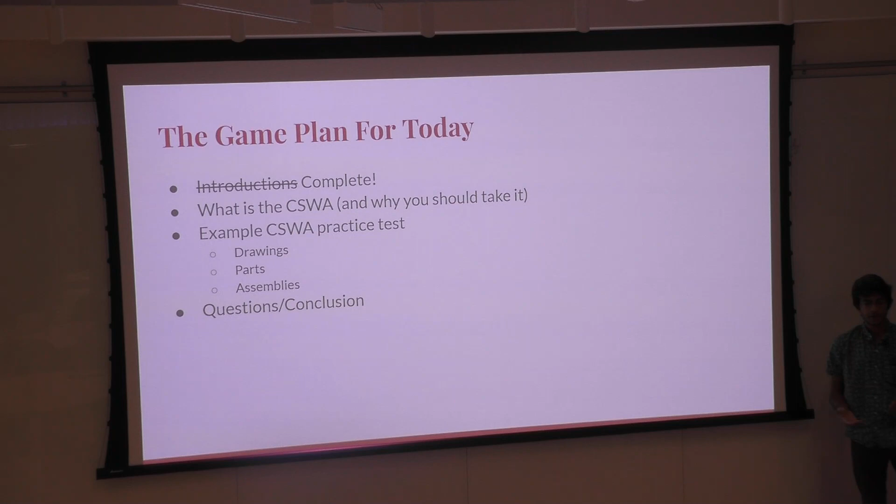I believe out of the millions of people that do SolidWorks, only some in the hundreds of thousands have the certification. So it's a very small percentage, meaning you guys will stand out amongst all other people. And for those employers that know they're looking for people with CAD skills, they can look for you guys and they'll see it.

All right, before we begin with actually going over the problems and such, are there any questions up to this point? If at any point during our presentation and during our modeling you have questions, just raise your hand and we'll come over and help you out, or we'll point to you and you can ask it out loud. This is going to be not very strict in terms of we have problems we want to get through, but our main goal is to help you guys learn, and so questions are a great way to actually get a better understanding of the material.

Okay, so thank you. So I think we've already gone over a little bit of the overview of what the CSWA is. But yeah, it stands for the Certified SolidWorks Associate in Mechanical Design. It is quite a long exam. You don't need to take 3 hours to actually finish the exam. I personally did it in about 1 hour, 45 minutes. So 3 hours is really if you're just really struggling, if you want to take a break in the middle. And you only need 70% to pass, so that's pretty good.

And you do need a knowledge of basic features, so everything from sketch tools to extrudes, bosses, fillets, chamfers, finishing features, basic drawing understanding, because you will need to identify drawings and, of course, model parts from drawings. You also need to know some of the basic evaluate features like mass properties, inertia, center of mass, stuff like that for assemblies. But yeah, basically pretty much the things that you would encounter if you're a regular user of SOLIDWORKS. Next slide.

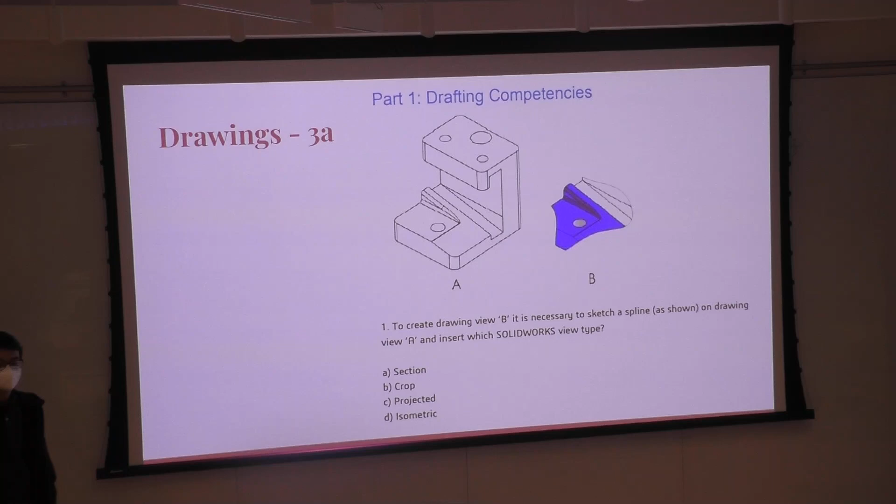Okay, I think it's been about a minute. What do you guys think? A, B, C, or D? What do you think? B? Okay. Why do you think B? Okay. No, that's good. That's process of elimination.

So that is correct. An isometric view is the most common view you should see of a part. You can see 3 faces at once. So that's A, right? You can see all of it, but that's definitely not B. Projected, that's kind of like PP that we saw, where you're looking at it from an angle. And so that's definitely not B, because you're not seeing the whole part.

Section is where you cut a part down the middle and you look at it from one side. This kind of looks like a section, you could be fooled, but again, you're definitely not seeing the whole part. And last, crop, you're only seeing part of the part.

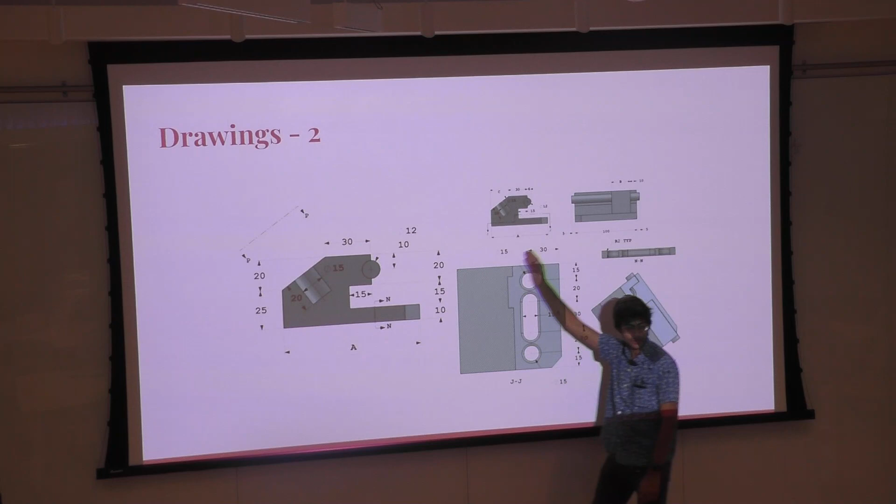I think section view here would be JJ. If you look at this one, see how it's cutting through the part itself and then showing that view? That would be a section, JJ. Well, actually, this whole thing is a section. On the left is a section view. And then NN is also a section. Okay, yeah. So what Abe said.

Section views cut into the part, and you'll be able to see the inside of the part. That's good if you have holes in the middle and want the dimension of the hole itself. Rather than using hidden lines to show the outline of the hole, you can just section view cut it and see the hole in the actual body of the part.

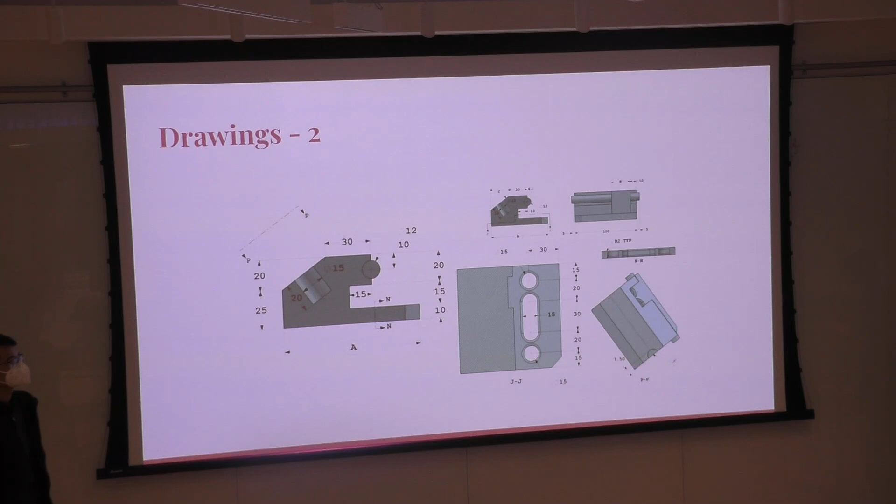Okay, this is the second practice problem. We'll take another 60 seconds. Okay. What do you guys think? That wasn't a minute, I know. What do you think? You say C? Why? Okay, that's good. That is correct.

It is C, a broken out section. A broken out section is where you can see the overall part, except for a small spline. A spline is basically an enclosed sketch, and that cuts into the part, so you can see the inside of the part.

So yeah, that's correct. One thing, I don't know if we put it in here, but the exam, when you take it, is proctored on your own computer. Proctored meaning it's software that they provide, and you download it and take the exam through that software.

However, you are able to Google the answers, not directly the answers, but more so you can Google what an aligned section is, Google what a detail is, check out what a broken out section is, and then compare it to the answer and say, hey, does this match here? And also, of course, you're allowed to use the SolidWorks help function within SolidWorks, like the documentation. So that's effectively the same as Googling, because if you're going to Google what an aligned section is, you're going to go to the online SolidWorks documentation. So yeah, either one is fine.

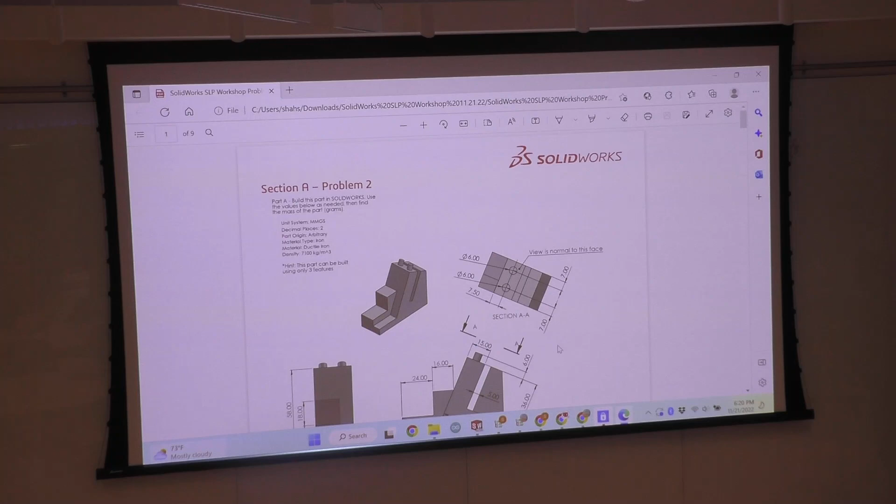So for now, we'll start off with section A, problem 2. This one should be pretty simple. It's nothing too complicated, and if you have simple CAD experience so far, it should not take you that long. This is going to be a problem that's easier than you'd see on the exam, but it's definitely a good place for us to start off because it helps with understanding how to work around the model and not just in a single right, top, and front plane sketches.

What we'll do is give you guys about 7.5 minutes to work on this on your own. And then in 7.5 minutes, we'll come back and I'll start modeling through it, and you guys can follow along. If you have any questions, raise your hand and Abe will come by and help you out. And also, the model is up here on my left.

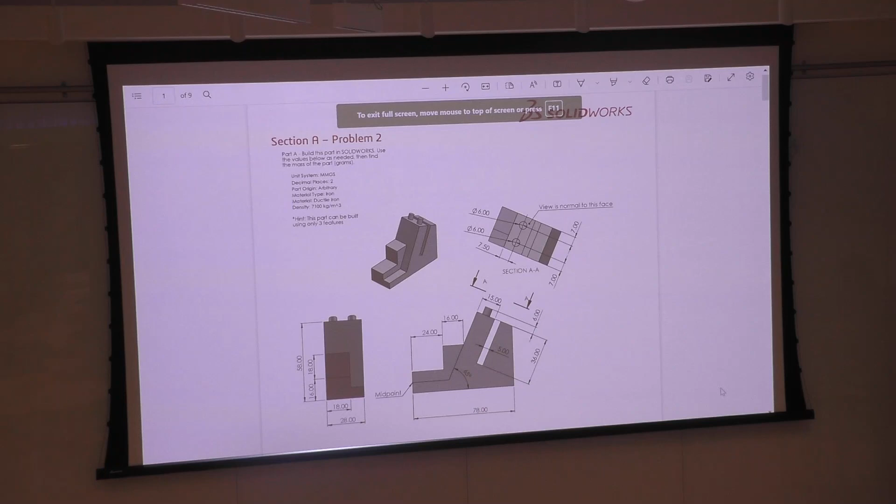Oh, yeah, it works out. Let's do that. Okay. Yeah, so 7.5 minutes. Good luck. I mean, sure, any timer website will work. Yeah, I'll come around and give help. You don't have the problems email? Do you want to email it to him? He needs the problems. Wait, so you didn't get the email at all? Okay. We sent out the email last night at 10:20. Did you sign up after 10:20 p.m.? Okay. Just go to the last person who responded to our session form then. If you want to just forward him the email we sent out last night, that would work too because it has the attachment.

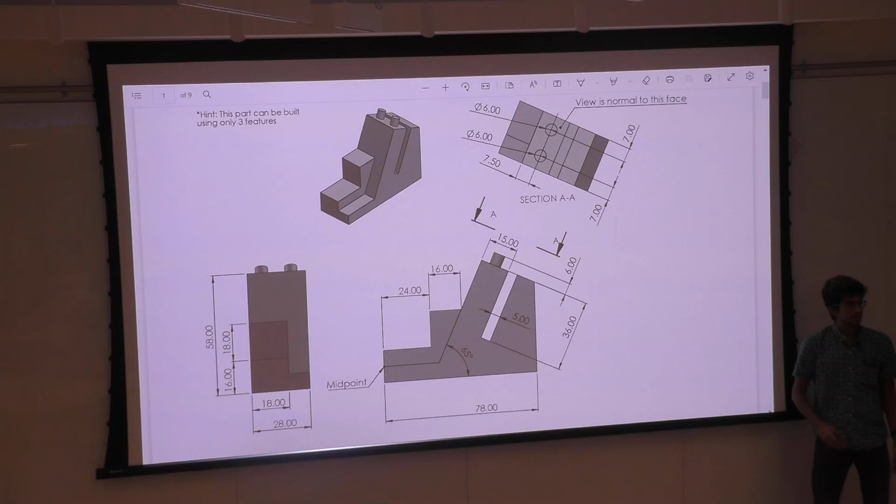Okay, that's not bad, yeah. I wouldn't recommend, for now, worrying about that too much. I think that's more like once you know how to build a part and the different ways to do it, then you can figure out how to do it in a few features. For now, your first goal should be, how do I get the part made accurately? But that's not a bad idea to keep in mind. And when I do this with you, I'll show you how to do it in 3 features, so you can see the process that goes into that.

Right. Also, the exam only asks you for these parts. It only asks you for mass. So you don't need to worry about if you hit 4 features, 5 features, whatever. As long as you get the correct mass, you're fine. Exactly. It's just to consider. You can make it in 3 features. Yeah. It's a little bit of an extra challenge. All right. Any other questions before I begin?

All right. With that being said, I will start this. Keep in mind, while I'm going over this, please feel free to raise your hand and ask questions. If you're struggling within SOLIDWORKS itself, raise your hand and Abe will come to you and help you out. If it's more of a conceptual question, or a, wait, what are you doing here, I will answer that question for you too.

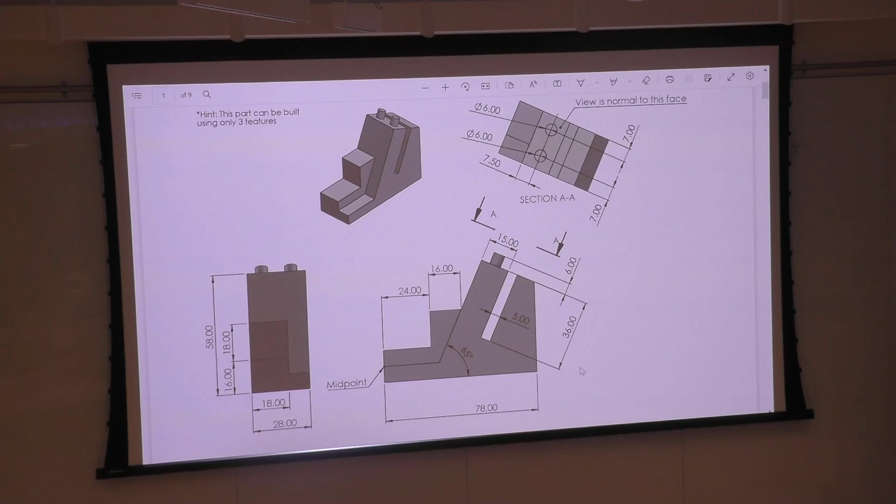So let's do this. One thing you're going to notice I'm doing is Alt-Tab. If you're on Windows, Alt-Tab will switch between your 2 latest screens. So if I do Alt-Tab, you can see all the screens I have open. And so I can go between SOLIDWORKS and the drawings really fast and easily. This will probably help you in the exam itself, unless you have 2 monitors. If you have 2 monitors, you're chilling. If you have 1, you just want to Alt-Tab. It's fast, easy, and you can quickly look at what you need to see.

So let's do, okay. All right, so what am I looking for when I first open this up? I'm looking for the basic geometry. I'm trying to analyze this in 3 planes mainly. Like, how am I going to construct this? What are the sketches I need to create this?

And so when I look at this drawing, the first thing I think of is, hey, I can build all this geometry right here in 1 sketch. Not thinking about the different levels of boss extrusions that need to happen. I just think if you take a silhouette of this, all this can be made in 1 sketch. So in my head, I'm like, okay, this could be a good starting place right here. That will get me a good majority of what I need to get done here. And then I can focus on the 2 knobs afterwards.

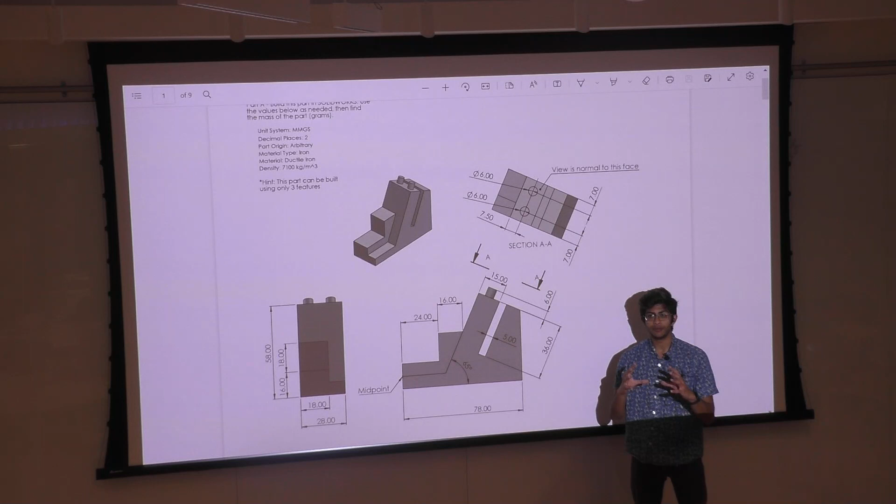I saw some people trying to work it from the other side, from the front face going inwards, outwards. And that's one way to do it as well. That would work. You could do it that way and then just cut into it from the side, and that's definitely a valid way to do it. But for me, I'm trying to think about extrusions, because extrusions will help limit the amount of features you have to do. With additive manufacturing in SOLIDWORKS, it's a lot easier to build up rather than cut down. By that, I mean it's better to try to extrude something rather than have a big block and cut into a block to create what you need.

And so let's start that. What I'm going to do is create a silhouetted sketch of this image right here and dimension it accordingly, and then I'll show you guys what to do from there. So looking at that, it was in the right plane, so I'm just going to sketch in the right plane. And we always want to use the origin when we start the sketches. So I'm going to use it as the bottom left point right here. It doesn't matter bottom left, bottom right. Just want the origin somewhere in your sketch.

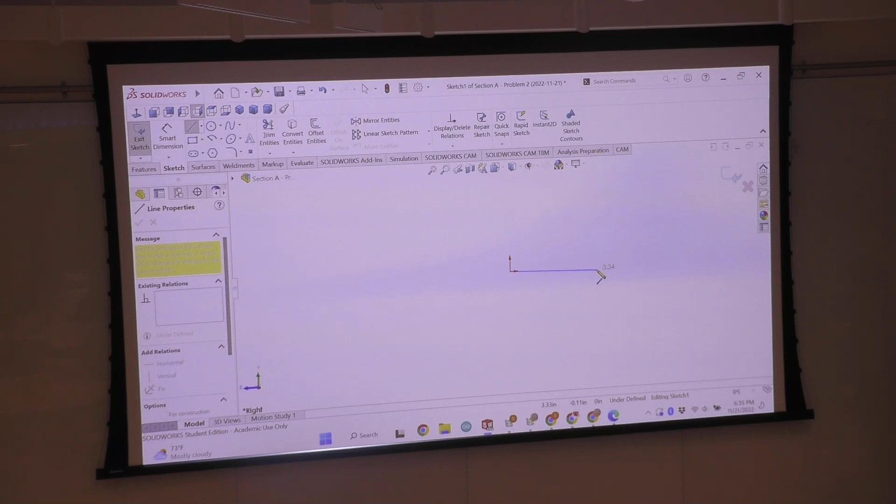Oh, but before I begin, notice how in the bottom right it says IPS. That means I'm in the wrong unit, so I want to make sure I click that and switch it to MMGS to ensure that when I model this, the dimensions will be correct. So going back to the right plane, we can see that it's telling us to go across, up, and then diagonally that way.

I'll try to talk through this as I do it. It will be a little bit hard because when I model, I don't normally talk out loud to myself. So if at any point I'm doing something and you have a question about it, please just call it out. I'll be happy to explain what I'm doing.

This first step, I'm not trying to get accurate to-scale measurements. I'm just trying to get the rough outline. Notice how the degrees aren't going to be perfect, the lengths aren't going to be equal. It's all a matter of the rough outline. So looking here, I have 2 options. Either I can come down going this way and then build this part, or I can go around. It does not matter. This is just a sketch. You can do whichever option floats your boat.

So for me, I'm just going to come down here and then go across and come down. And then I'm going to do this part by going up a bit, this way, up, and then across. Okay, this is our very rough sketch. It looks similar, but not quite what's shown here. Everyone good so far? Anybody super lost? No, didn't lose anybody? Awesome.

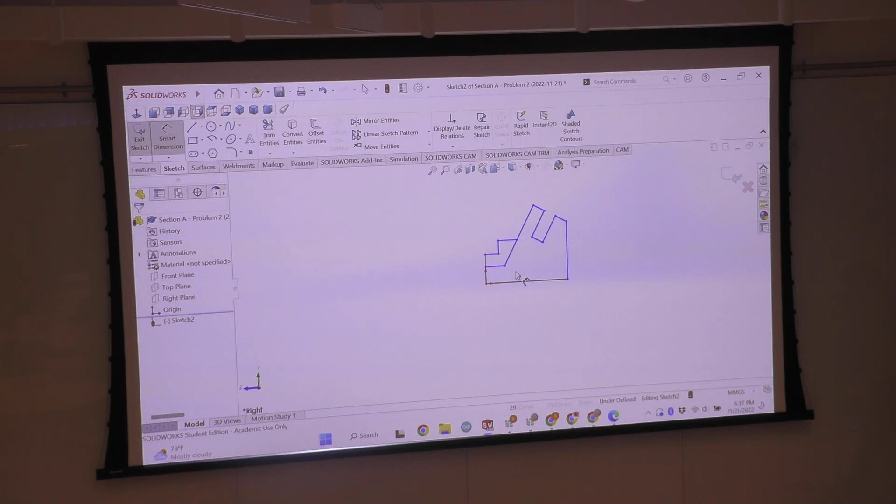So I'm going to add horizontal, make sure these lines are horizontal and vertical. These should be perpendicular. That's fine, this is vertical, that's horizontal. And looking here, these lines are equal, this one and this one. We just make that equal real quick. Okay, now we're going to add dimensions. Looking at the bottom, we have 78. So we hit smart dimension, 78. Because it's a big number, we can tell that we're in the correct units because it's millimeters. Then this is going to be 36.

24 and 16, so this is going to be 16, be 24. So things are getting a little wonky. That's okay. Don't worry about it. Just keep adding your dimensions. Everything will sort itself out. And if it doesn't sort itself out, then you can fix that by redrawing part of it or redimensioning part of it. That will help reset what needs to be reset.

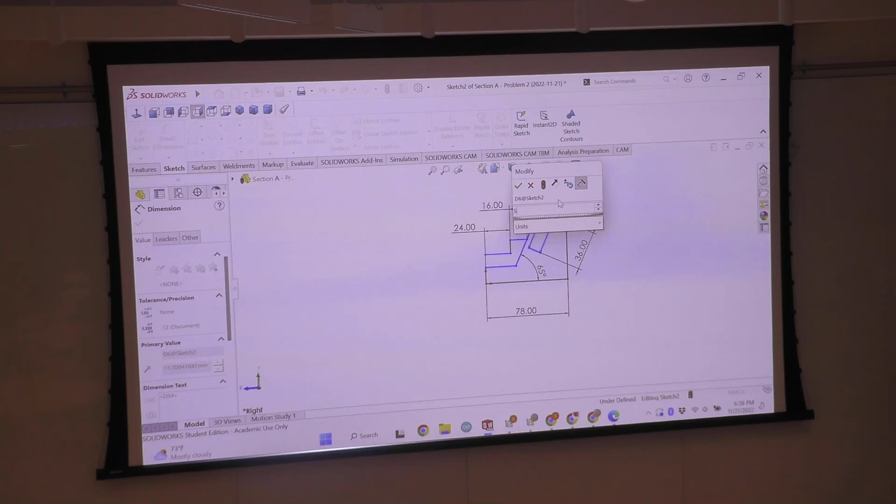65 degrees. So we're looking at a width of 5 here. And then, so okay, what I've done so far is I've sort of just looked at this one sketch. So that's 15. So that's the last bit I could add here. But there's so much blue. Blue means that it's underdefined, and we want it to all be black. So what do we do here? We have to look at the other two sketches that it provides us. Look at the other drawings and dimensions, and then figure out from there.

So looking at here, this bottom left one, I see that the height of the line here is 16, and then it's 18. So that's referring to these two, I believe. Or actually, it's referring to this line with this one right here. This is going to be 16, as shown here. And the reason I know it's not this midpoint line right here is because if we look here, we see a smaller line and this top one.

So I'm just realizing that this is what that middle line right here is. And the second one is going to be this line right here. And then we see that's 18 above here, so we can easily dimension this to be 18. And right away, we're getting a lot more black, which is great. Now we look in the top right here and see what we can find. I don't know if we can find too much. Oh, we can add this right here. This is 58 high. So it's looking like from the top point right here, this corner edge down is 58. So by going back to smart dimensioning and then adding this dimension there, we can make this 58.

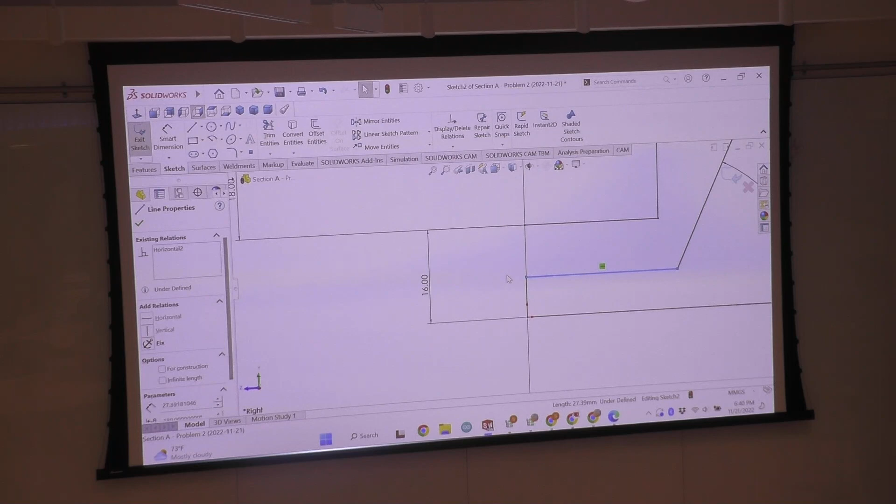If you're working with global variables and things that need to change, you want to make sure that this won't affect any of that. And we'll go into what global variables are in a bit. But for now, we'll go back to dimensioning just this one to half of the length of 16, so that's going to be 8. And that midpoint's that line right there, and we should be good. So notice how everything's black. At the bottom it says fully defined. We're good now. We have our main sketch done. Are there any questions?

Another reason why I chose to do this sketch first was it looked like the most complicated one. Getting the most complicated sketches done first will definitely help out later on because that's where all your mistakes will probably lie. So if you get that done well and correctly, the rest of it's just easy. Okay, so moving on from here, let's exit the sketch, and we want to do an extrusion. So we want to do features, boss extrude, and the sketch is selected. So we want to select the contours, and we'll start with this area. It doesn't really matter which one you start with, but you're going to need 2 boss extrudes on this one sketch. I'll show you how to do that.

So we're doing this thicker area, and looking at this bottom left one, we see that the thickness is 28 millimeters. That's the total depth, I guess, of this part. And so hit 28 for the depth here.

And then we have this little bit that we need to do still, so we can just click this arrow down here, click Sketch 2, and extrude boss base. We're able to now click this new area. It is a depth of 18, so we're going to change this from 28 to 18. And bam, there you go. So that's the majority of your part done. And we've only used 2 features so far, so we have 1 more to go.

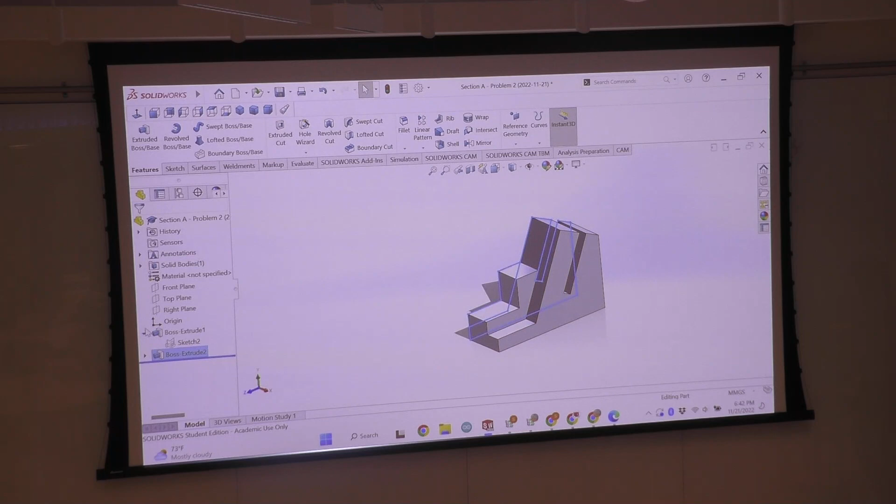Now the last part we need to do is add these little knobs at the top here, and that's done with these circles. I hope all of you know how to make a sketch on a plane. If not, I'm about to show you. We just have to rotate around. I'm doing this by holding the middle click button to rotate around the part. Click the face that we want to sketch on. So I left click on the face and then left click the sketch icon.

And now we're sketching on this face, which looks weird, again, because of the angle at which we're looking at it, since it's an angled face and not a straight down top face, but trust that we're sketching on this face. So the 2 circles of 6 diameter, 7 from the side, and 7.50 from there. A few ways to go about this. We can just start by sketching out these circles. I'm going to zoom in, and we can add dimensions.

Since they're both the same dimension, I'm just going to dimension one of them and then put an equal relation. This means that if we need to change both of them, it's really easy by just changing one dimension. It'll help us out if we ever need to go back and make edits. This is only good if you know that both of the knobs should be the same size. It's more of an application when you're modeling for a car or a part. If you know that 2 things need to be the same size, use the equal relation. It makes your life a lot easier and makes the sketch a lot less messy.

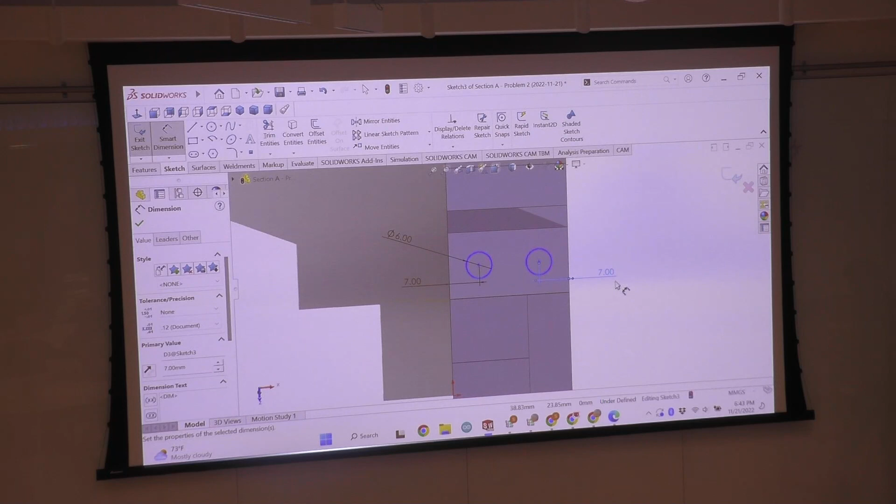So going here, we're going to just add 7 from the side. There are, again, cleaner ways to do this, but for now I'm just going to do it one at a time because the cleaner ways might get a little bit confusing. And then 7.50 from the top. Now, we know that 7.50 is halfway through because we see the 15 in the bottom right sketch right here. But let's say we didn't know. We'd want to make sure that we're doing it from this line right here and not from this bottom one, just in case it's 16 and this should not be centered. We want to make sure we're hitting the correct line, and that's going to be this line right over here.

And so in our sketch, it's this one that I'm using right now, and that's 7.50. Both of them are in line, so I'm holding Shift, clicking both center points, and clicking horizontal. Now they're both black, which means they're both fully defined, and we will extrude these. It says right here it's 6, so we'll make this 6, and we're good. And so now we have our part basically modeled.

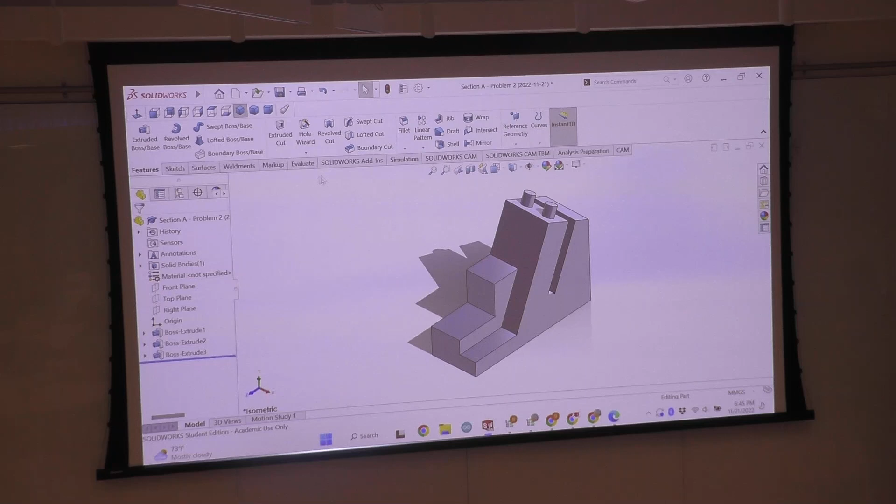Last thing I want to do, and this is going to be important for the exam, is you've got to add your material. It does not matter if you add your material at the beginning or at the end. So I'm just going to add my material now. It says it is ductile iron, and the density is 7,100 kilograms. So I'm going to right-click on the material, click Edit Material, and look through the materials that SOLIDWORKS provides to find it.

So it's an iron, ductile iron. I'm just going to make sure the mass density right here, 7,100, is correct. It should never be wrong. If it's wrong, something within SOLIDWORKS is probably wrong. It's just good verification that you selected the correct material. So apply, close, and now we can go to Evaluate, Mass Properties, and we see that the mass here is 497.28 grams. If we scroll to the bottom and look at the answers, the answer should be 497.28 grams. It'd be really embarrassing for me if it was not.

In any case, do you guys have any questions about this? I know I sort of went through it. No one really stopped me, but if there are any questions, now is the time to ask before we move on to the next part. Yeah?

So did that answer your question, by the way, of how to do it? It was your question about how to do a few features? It really starts off with just finding the most complex sketch and then doing it that way. Yeah?

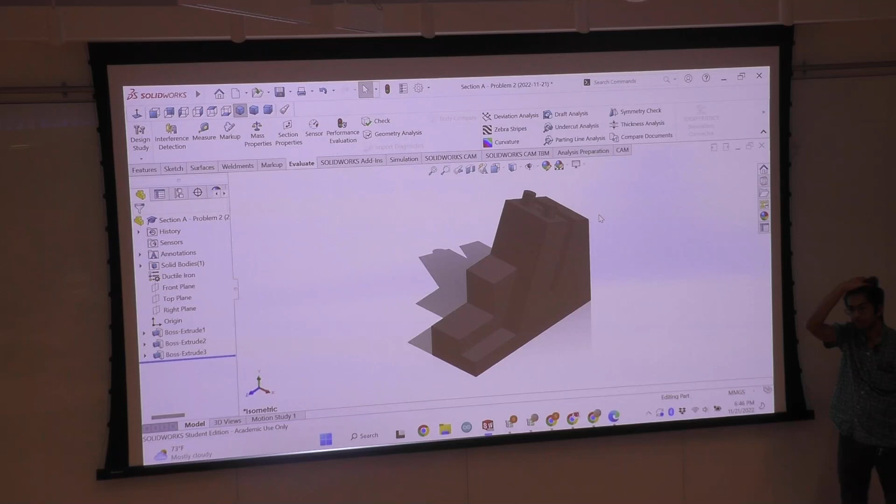Yeah, so the only time it won't work itself out, it's really annoying when this happens. I'll show you guys with a quick part here. It's more so when, notice how when I modeled part of it, one of the lines went down lower than another line. If you add a dimension between these two, it might push this bottom line up higher when you want it flipped around. So that's just something that might be a little annoying. I'll show you what I mean real quick.

Like if I have a... It could help, yeah. So if I do something like here, and then I want to do something like this, for example, and then I measured this, because this is going to be 0.69. So if I want it to be in this order, and I go here, I write 0.5. Oh, what just happened? Oh, okay, so it's in degrees, and that's because this was not a straight line. So that's one issue that might pop up. So you want to make sure that your lines are going to be straight. Let's make sure this is straight as well. Okay.

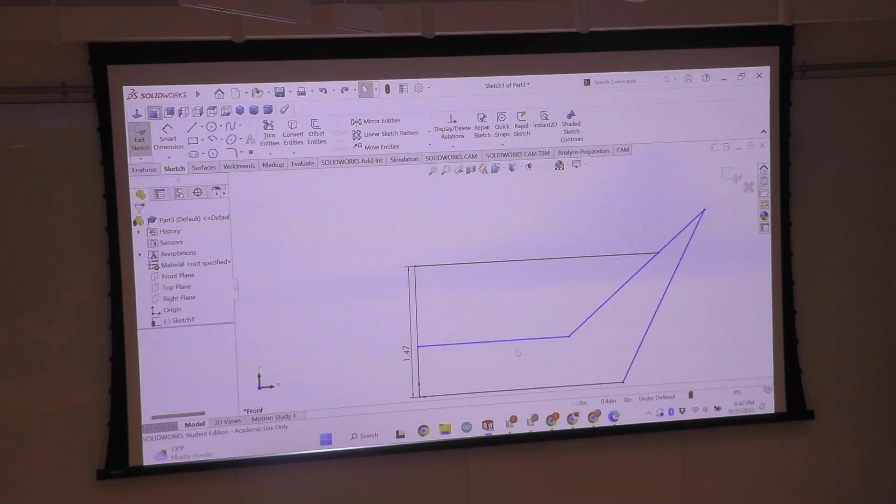Yeah, so going back to the dimensioning, if I go here and do 0.5, or size. Okay, well, everything stays relative, but if I were to, okay, well, kind of defeats the point. But something like this where it changes might occur. And then you need to move it down manually to make sure it stays between your two lines. They're not hard fixes, it just gets annoying. But if you add the relations, like I showed you making it horizontal, that'll help with the angle situation.

Basically, long story short, do the relations first, then do dimensions, because that'll make sure everything's constrained properly, especially with your perpendiculars, your parallels, your tangents. It helps with doing circles and lines. You want to make sure they're tangent, because if they're not, they'll come apart or they'll be connected in a weird way. And that'll get really ugly.

Okay, are there any more questions? Did everyone sort of follow along with how that part was modeled? Anything confusing in that regard? Okay, are you guys ready to move on, or do you want some more time with this part? I'm good for both. Raise your hand if you want a little more time with this part to figure it out on your own. Raise your hand if you want to move on to the next one. Okay, a few of you didn't raise your hand. Do you have a preference? No preference? Okay, let's move on.

If you're still working on this, that's okay. I'd recommend sticking with us for the next part and then come back later and ask us your questions afterwards. In the meanwhile, I'll pull up the next part. This one is going to be Section E, Problem 2. Would you prefer if I just model it right now, or if I give you a little bit of time to work it out on your own? Raise your hand if you want the time on your own. All right, cool. We'll give you about 10 minutes, so until 7 o'clock.

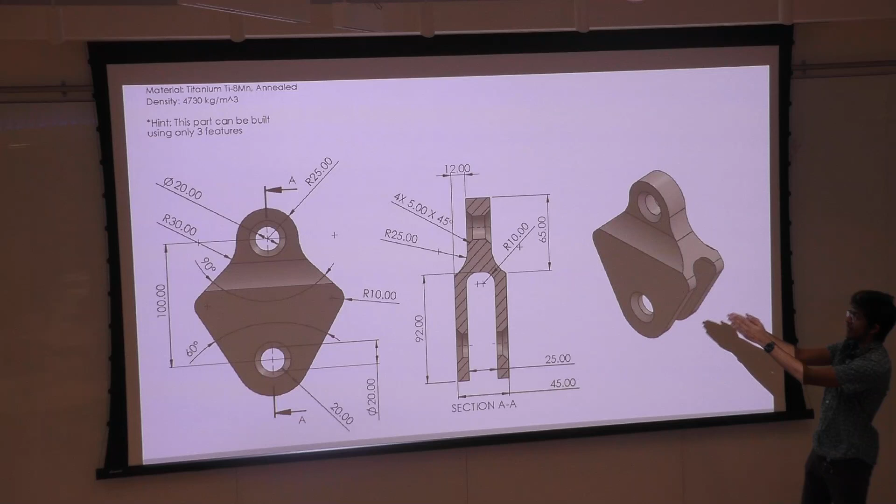Can someone guess which way might be the better way to do it? Which face? Should we start off doing this one and then cut out that, or model that, cut this out? Left one, model left, cut out right? Yeah. So going back to what I said about complexity, we want to do the sketch with the most complexity, and looking at that left one, that looks more complex than this right one. So let's start off, and we'll start sketching this on the front plane.

So let's see. Okay. So looking up here, we have MMGS, titanium alloy. For this one, I'll actually just set the material first, because, oh, my bad, it does not matter what order you do it in. So titanium alloy, we're looking at Ti8Mn annealed. Just check real quick. Your density is 4730. You're good. Apply, close. All right, next thing, IPS.

Let's change to MMGS. There's also a way if you just ever want to work in MMGS, which honestly is my preference. It's just recently I've been doing a lot of inches for class and projects. I prefer MMGS, and there's a way to change your default. If you have a question about how to do it, I can help you out later. But this is a really quick, easy way. Just click the bottom there and change it. All right, front plane. Let's do this.

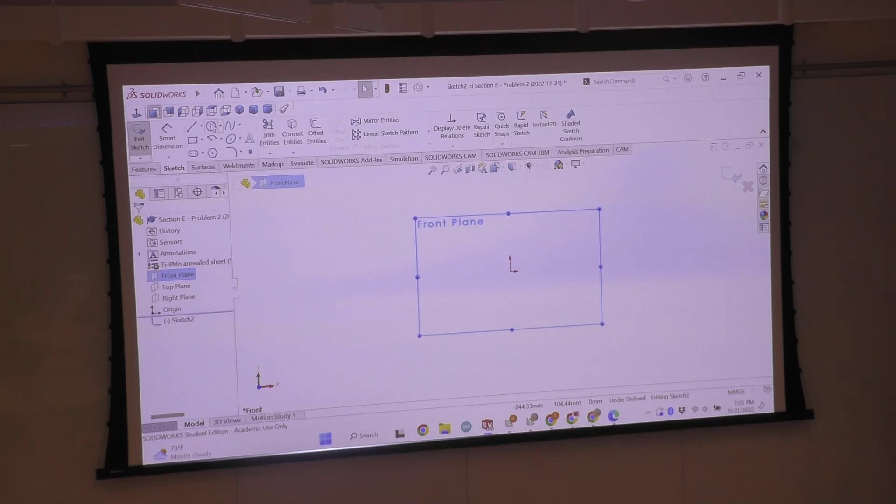So starting off here, when I see circles, I immediately think I want to put the center point of this circle on the origin. That way it just makes it concentric, and it's really easy to dimension everything off of that. So I'll start with this top. It doesn't really matter if it's bottom or top on the origin. I'm just going to do top because that's what I prefer. And so we'll just start off with the rough sketch. So we have 2 circles like this.

You could also do it with a circle and an arc, and actually a circle and arc might be better in this case because you have an R. When you see an R, you know that's a radius, and R generally means an arc that you're using. And when it's this sort of shape, that means diameter. You can achieve the same thing with circle and circle without using the arc. Then we have two lines coming out this way. You see a curve here. That can either be a fillet or a 3-point arc. For now, I'm just going to make two lines, and we'll figure that out as we go.

Actually, looking at this right now, I realize that these two sides are identical, meaning we can mirror it, and we don't have to draw both. We can just draw out one side. By the way, if you ever rotate your plane accidentally, click the normal to button here, and it'll make it flat, your face on the plane again. In any case, I'm just going to draw a center line. This one does not need to be dimensioned. It's just going to help me when I want to mirror it afterwards.

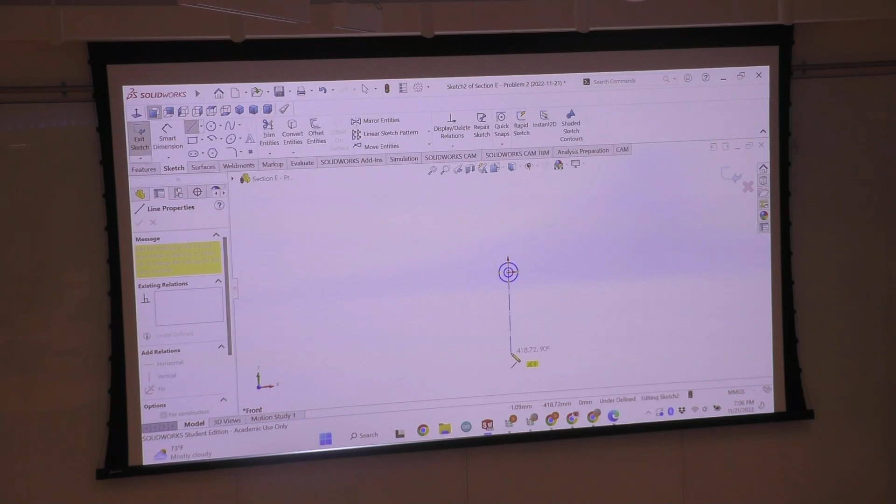So center line, and then I'm going to look here and see that this is a straight line, and it comes down this way. Once again, you have some sort of arc, but I think I could do it with the sketch fillet. So we're going to connect it here, come down this way, and then come this way. We have another circle that's on the center line, so we'll just plop that somewhere here.

You notice when I hover here, you see a yellow point. I want to avoid putting my circle on this yellow point because that's going to create a relation between the center point of the circle and the midpoint of the center line. That's a relation I don't really want, and it's going to be complicated to dimension because that relation will stop it from dimensioning properly. So I'm just going to make sure it didn't connect and we're good. And now we have the general gist of this overall shape.

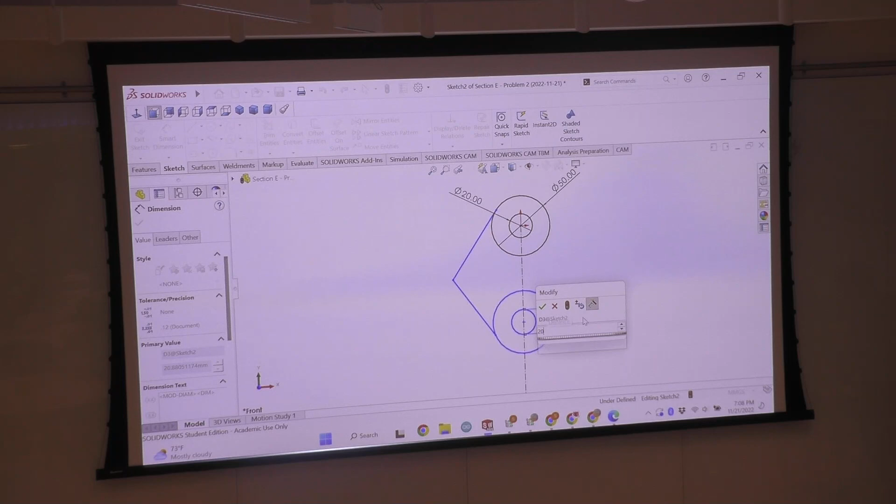So looking at this, we'll start with the circle. We have 20 for the diameter in the middle here. So smart dimension, and then 20 millimeters here. And this radius is 25, so we know that's going to be a diameter of 50. And we'll do the bottom down here too. Okay, so this distance actually is not the diameter. It's a distance between this arc and that circle, which is perfectly okay. So we see this is 20 for the diameter. And these two, you click on both to create the distance between them, and set that to 20.

And now when we look down here, we see that this is a straight line that goes right into the circle. So we know that has to be tangent. And so we can just click here, shift-click the circle, and we can make sure that it's a tangency constraint. So we changed it from coincident to tangent. Coincident was just that the line intersected the circle. Tangent means, as you guys know what tangency is, it's like one point of intersection between the entire line and the circle. And that means that if we were to shrink this, for example, to make this 10, the line remains tangent to the circle. So back to 20 here.

And then looking at this point, this is 60 degrees from the center. Or sorry, 60 from side to side, so 30 from the center, and that's 45 from the center. So we can go ahead and smart dimension these two lines right here. This is going to be 45 from the center, and this is going to be 30 from the center here. Now, because it's getting a little bit close, it's hard for me to really see the dimensions. I'm going to add the height dimension to spread it out.

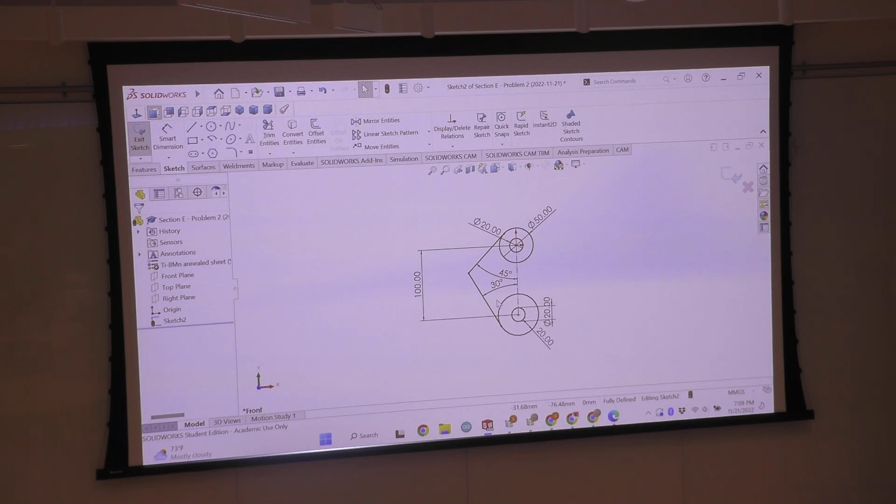Okay, let's see where to look here. Right here, we have 100. It's between the two center points of the circle. So from this point to this point, we can do 100. Now, one way you could have done this as well is, notice the center line I have here. This could have been connected at the center point, end to end. And then you could dimension that center line to be 100, and that would also change the height of this shape. Either way works. It's up to your preference.

Anyway, everything is black. It's technically fully defined. However, as you can tell, it doesn't look like our model yet. So, looking at this, let's figure out what else we need to do. So we need to add these fillets. So this is 10. But before we do that, I want to make sure that this connection is correct. And currently, it doesn't look like it is correct because this should not be tangent to the circle. So I'm going to delete this right here.

I'm going to remodel this where off the circle, I'm going to do a 3-point arc. So clicking this point on the left side of the circle, and then clicking a random arbitrary point here, create a 3-point arc, like so. And then I'll create a line from here to here. Now we'll smart dimension, and we'll do this at 45 degrees. And we know this should have a radius of 30.

And then we know that this line looks tangent to this circle, so we can make that tangent right there. And notice how we can still move this around. So we need another dimension here that'll help us out with this. So let's see, what can we find? Is it tangent to this? Oh yeah, sorry, I should make this tangent. Thank you, Abe. So these two should also be tangent. And once you do that, now the entire thing flows in one go. From the circle, it flows down to this line, and it looks smooth just as it does right here.

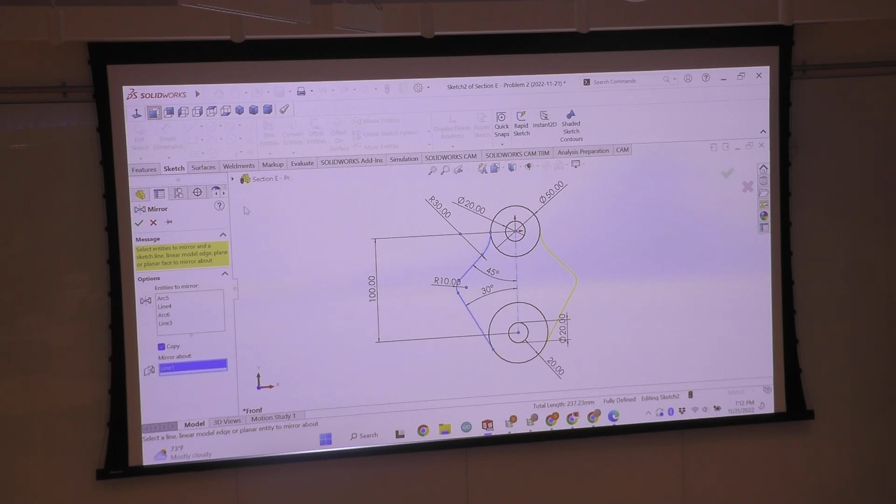Now the final step is just to mirror all this over. And that's really simple by just using the mirror entities tool and clicking these. You can mirror the circles, but it shouldn't do anything at all because it's just mirroring on itself. I'd recommend avoiding doing that in case it creates any overlapping geometries. So once we mirror, everything is all good. And now we are ready to extrude. So it's a complicated face, and now we're able to extrude all this area right here. And we look at the depth, and the total depth is 45.

We're going from end to end, and it'll cut out what we don't need afterwards. So 45 degrees, or 45 millimeters. And that's our block. So that's a giant block that should be this. So if we go to Control 7 view, Control 7, by the way, is isometric. Looking at this, this looks roughly the same shape and parameters as this shape right here. So we're doing good. Next up is to go on the right plane.

I can't exactly click any faces here to extrude or to cut into because they're all slanted faces. It'll make life really difficult to do it that way. So you just click the right plane and sketch on the right plane, and then you'll be good. So looking at this again, we see that we need to do some sort of, what's it called? I guess a curved and a rectangular prism here on both sides, and then this part down here. This looks identical, so I can just actually mirror it like I did before.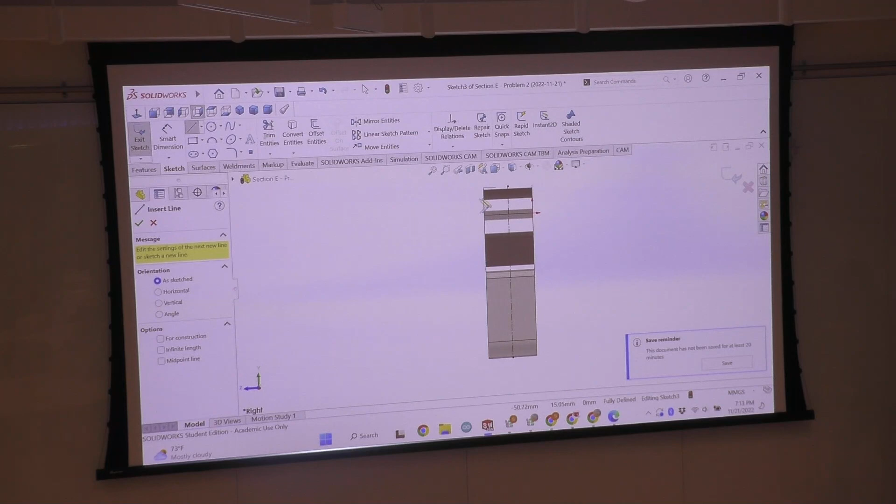So create a center line. If you hover over the line, you'll see the yellow dot. That's the midpoint. We come down, and now we have this. So 12 millimeters. We can start drawing out our shape. Remember how I said before your drawings don't need to be accurate? This is another instance of that. You don't need to be exactly what it says, just somewhere in the right area. I'm going to try to do this with a sketch fillet because it's just a simple arc. And we'll see if this works.

So if I do smart dimension, this to be 12. And then we have the height of this is 65. And then this is a radius of 25. So if we go to sketch fillet, go here and make this 25. Okay, let's see. So that would not work. And since that doesn't work, we just have to delete this line and create an arc. Yeah. Okay, that's fine.

So looking at this 25 radius, 12, we're good there. We just want this line to be straight down right here. And then we're going to create a relation between this line here to make it tangent, and this line, and that's fine. And then we're going to smart dimension this to be 25, radius of 25. All right, now it's all black. Now we're good.

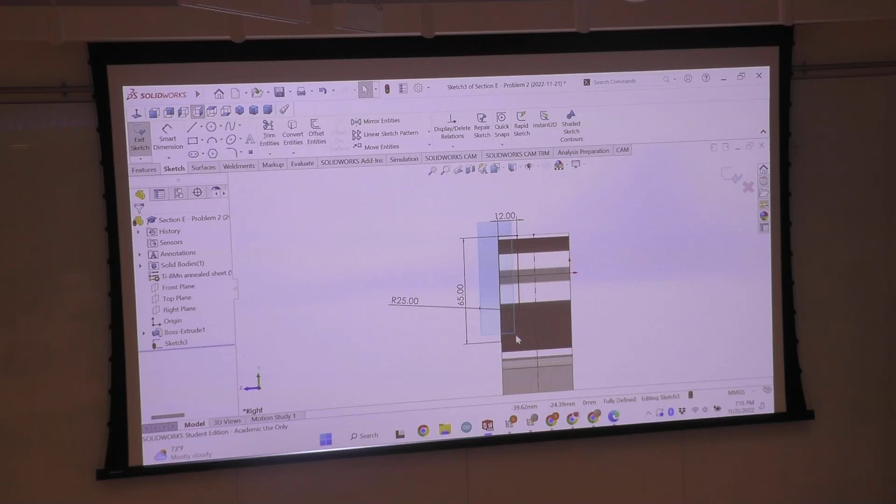We can take all this. So I'm just left-clicking down, highlighting all of it. I'm doing mirror entities, and I'm going to mirror all of this about the center line. And it lines it perfectly on that side, so we're good. And the last thing is to add the cut down here. So this one's also really simple. This one looks like it's more of a sketch fillet because the two corners look identical in terms of the way they're rounded out. So I believe using a sketch fillet here would work.

So I'm going to do a rectangle, and I'm going to model it like this. And yeah, so let's do it. So 25 millimeters for the width of this rectangle. And then your height of this rectangle will be 92. And that lines up, okay, 92. And this should be a center line, so I'm just going to make it so, hover over here, select that yellow dot, shift, hit the center line, and make this coincident. And that fully defines everything.

That sort of shifts it so the midpoint of that middle line is coincident with that center line, so it's all symmetrical. And then we want to round these out, so sketch fillet here. Okay. That's fine. 10 millimeters and here. So we're good. And we'll exit that. We'll do extruded cut. And we're just going to cut. So notice how, okay, so the right plane is direct center.

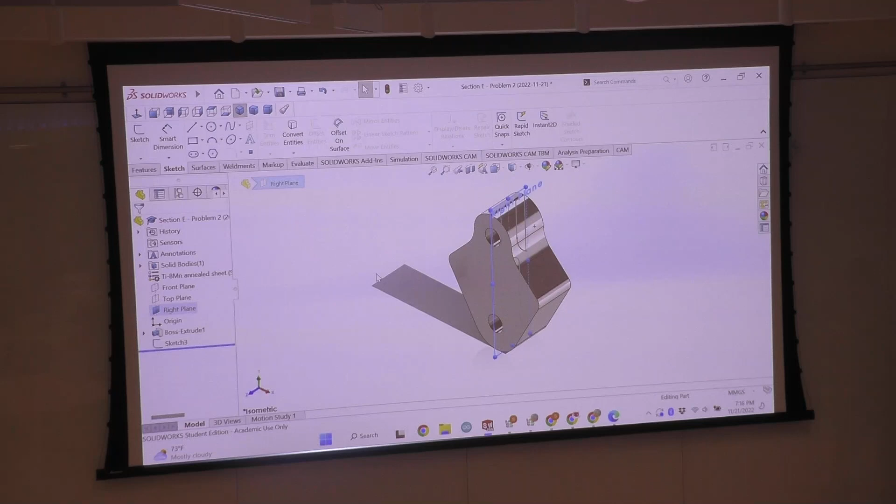And so the issue this creates, or it's not really an issue, but something worth noting. If we look at this right plane, it's right here in the center of the model. So we can't just do a blind cut one way. We have to actually go ahead and change our cutting parameters. So it's not blind one way, but it's through all, both. It basically makes it so it cuts all the way through the entire model, going forward and backwards. Select that, and now we have what looks like the correct part.

So Control 7, isometric. It looks similar to what's shown here. I wouldn't worry about the glossiness. That's just your decal and your material properties. That won't affect your mass or anything if it looks shinier than the way it looks in the actual model. Going to evaluate, we're going to check the mass properties here. It's 1088.47. Scrolling down, we're on section E.

Oh, thank you. Yeah, so one thing I did miss, and thank you for pointing it out, is the chamfer that's located 45 degrees right here. So it says 4 by 5 by 45. Does anybody not know how to read what a chamfer means or what this means right here? Okay, cool. So I'm going to add 4 chamfers, and they're going to be 5 millimeters with 45 degrees.

So features, fillet, it's under fillet, chamfer. So we're going to just select all of these parts right here. We want to make sure we don't select the inside portions here, and we know that because only 4, and also it's only shown as like the outsides. And then we're going to change this to be 5 millimeters. Default's 45, so we don't have to worry about that. Select that. Now we're good.

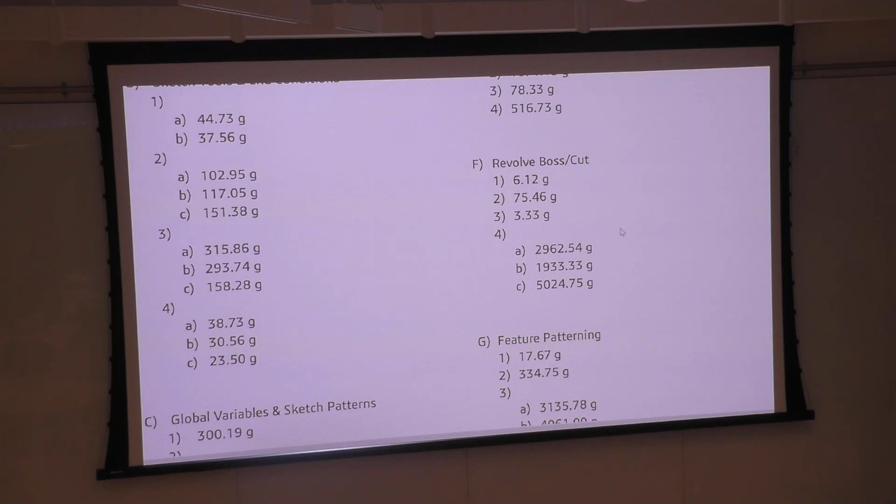And so now when we check the evaluate and the mass properties, we're at 1071.13. And the actual one is 1071.13 grams. So we are good here. And thank you for pointing out the chamfer. One thing to note is, yeah, double checking your part is very important, and recognizing if you miss something like that. Sometimes the mass will be a multiple choice question where you can select which mass. And so if your mass does not match one of the ones listed, that means you made a mistake somewhere.

Other times the mass will be a fill in the blank, and you have to enter your own mass. I believe, generally speaking, it's multiple choice first, and then as you update your parts, then you fill in your own mass. So it should be relatively simple to figure out if you did it incorrectly. You can get it correct if your mass is within 1% of the actual answer. So if the answer is like 1072 and you have 1071, you'll still get the question correct because you're within 1% of the actual mass.

However, the problem that may cause is later down the line, if you're updating your model and changing up certain dimensions, that mass may be bigger than 1% of a difference. So try to get it as close to the actual mass as possible. That was definitely a lot more complicated than the first one I showed you guys. It took a little bit longer for me to go through it. So does anybody have any questions whatsoever about this model or about anything I did during my modeling of this model?

Yes? Can you go back to when we did the right side sketch and cut through the side of it? Yeah. So I'm going to go here, edit sketch. So this is what I did here. So actually you could do this in a couple ways. With SolidWorks and with modeling, there's so many different ways you can go about doing something, and you just choose which one works best for you.

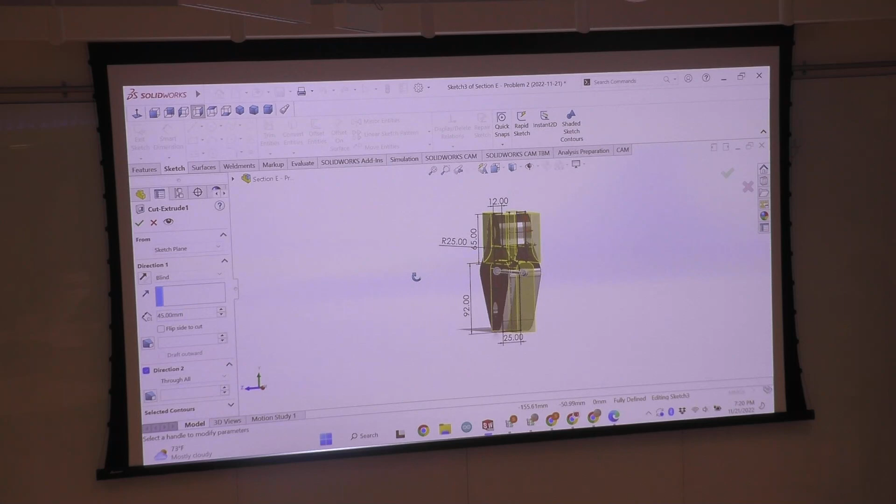That's a similar thing, but can you go over the difference between through all and through all both? Sure. Are you good with this? Yeah. Okay. So let's go to the feature that I did right here. I can quickly run through what the different ones are. So a blind is you setting out how much of, a blind is like this. It just goes one direction, however far you want to go.

However, this option here that says direction 2, you click it, it'll go both ways, and you can change it. So if I want to do 45 millimeters in one direction, and I want to do like 10 millimeters in a different direction. You can do this way, which is a little bit one way, a little bit more the other way. I don't recommend that. It's complicated. It's ugly. You just want to stick to blinds if it tells you to go a certain depth.

Through all is good if you want to go all the way through. And through all both is what I showed you with direction 2. It starts direction 2 and sees a through all right here underneath direction 2. And that's through all both. It just means it goes both directions, forward and backwards. This only really matters if you're modeling on a plane that's centered in your actual solid body.

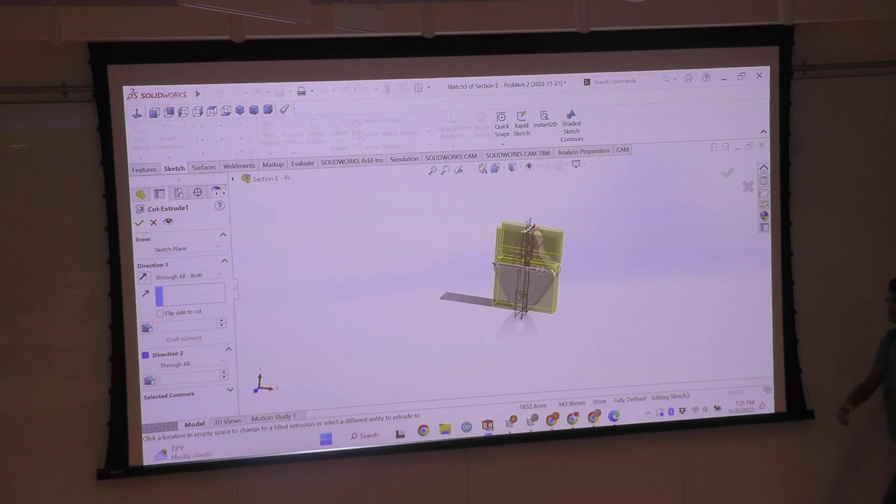If this right plane, for example, was on this side, you'd only need through all to get through the entire part. Through all both just means through all, but in both directions. And then you have the other ones, like offset from surface, up to next. They just do different things. So mid-plane, for example, would mean that it's a blind, but it's 45 millimeters total. So it goes 22.5 in this direction, 22.5 in this direction.

That's a mid-plane. So for example, if I want to be really fancy with it, I could have done this as a mid-plane. Because right now, if you look at this front plane, it's on the back side of here. If I want to really center this part at the origin, I would do a mid-plane, so the front plane would also be centered within the model itself. So the right plane would be centered and the front plane would be centered. That would make it really fancy, but that's not really necessary for this model. That's a good question. Any other questions?

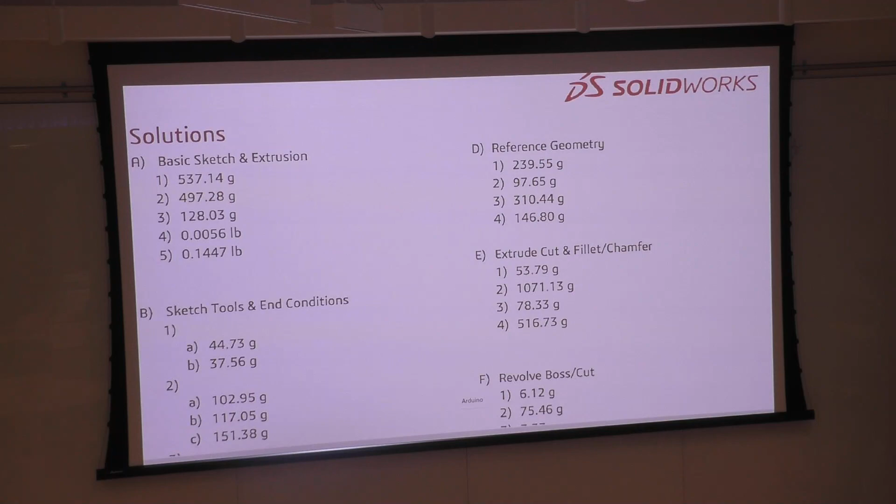When you're making a part based on the sketches they give you, is there anything you're looking for when you choose to use a sketch fillet versus an arc? There's definitely differences. You saw me work it through here because I was trying to figure out which would be best to use. When I see something like this, I think sketch fillet, because sketch fillets won't let you go past. If you're rounding a corner and you're 12 millimeters apart here, you can't go past that point. You can only do a fillet that goes from one side to another side. With an arc, you can go past that point and it'll redefine it properly.

So over here, this shows me 2 center points and a straight line at the top, which means you could have done an arc on both of these, or you could do sketch fillets, because they're the same radius. This is an assumption you have to make: when it shows you something like this and gives you one radius, you have to assume that is for both. It won't directly tell you that it's for both.

For something like this, I tried doing a sketch fillet, but a sketch fillet is usually a 90-degree arc, and see how the center point is way off here? If this was more in line, then it'd bring this side up, and that would be like a sketch fillet. So you just have to look at the arc itself, try one out, and if it doesn't work, just change it. Like I did that. I tried a sketch fillet, it didn't work, so I just changed it for an arc.

But if you're really trying to be efficient and not make those errors, if it's a 90-degree arc, think sketch fillet, especially if you see multiple corners. If it's one arc like this, think 3-point arc. Center point arcs you'd use sometimes. They're really nice and easy to use, but at that point you can use a circle and then just trim it. I don't really use tangent arcs too much. It's mostly 3-point, especially for an exam like this. That's the one you'd be using. Good question. Anybody else?

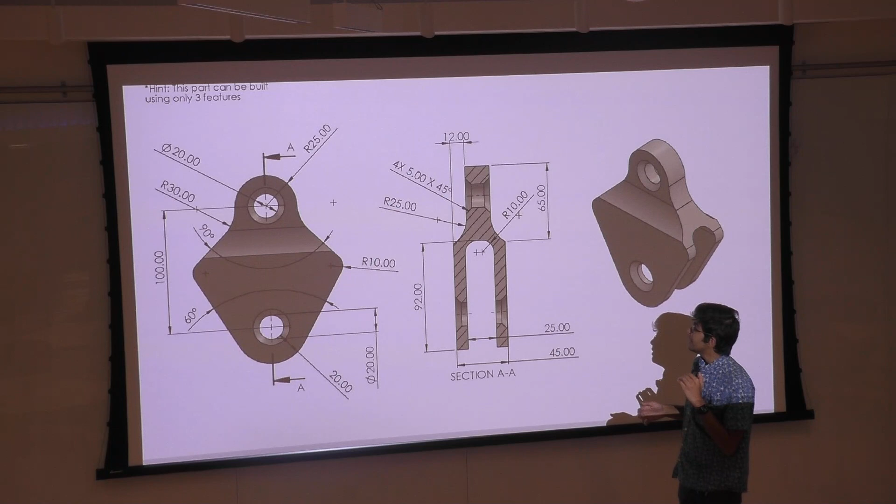Okay, so for those of you that raised your hand, that's pretty good. You're in a good spot. I think with a little bit more practice, you're definitely ready for the exam. If you're not there yet, that's completely okay. I think, again, with more practice, you'll also get there. It really is just practice when it comes down to it. The more you do, the more experience you have. I've tackled so many problems with these similar issues, and once you do the same issue over and over, you're like, okay, how do I get around this easily?

One of the things that helps make your designing faster is shortcuts. I don't know if you guys noticed, but I would accidentally do some shortcuts where if I'm sketching, to make things a little bit faster, instead of going up here to click a new sketch tool, I can hold a right click. I can quickly hit a line tool, or a square, rectangle, circle. It helps me make things really fast. I can quickly smart dimension without having to go all the way back there.

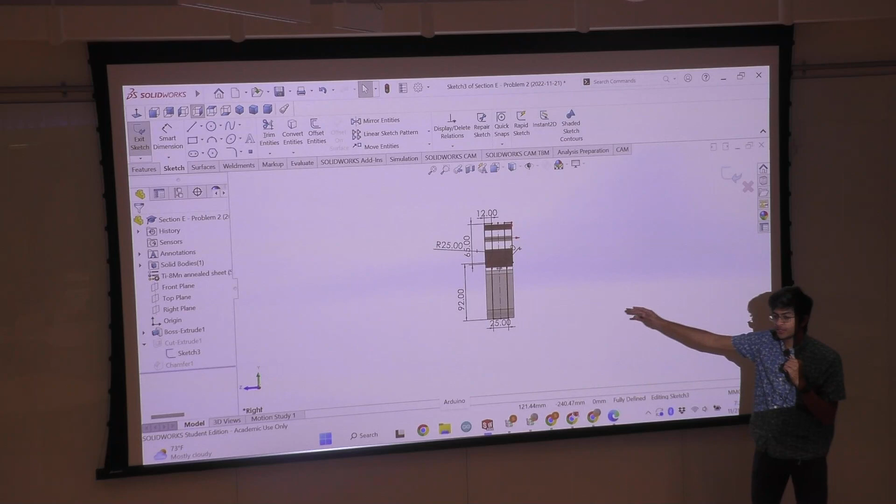However, for this exam, you really don't need to do any of this because you have 3 hours, which is plenty of time. For something like the CSWP, you may need to be able to model faster. That's definitely a more time-constrained exam. But don't worry about any of that. All that to say is the more you do it, the more you learn, and the easier it becomes. So don't worry if you couldn't do it as fast as I could, or if other people are able to do it better than you. It's completely fine. And again, we're here to help out. So if in the future you have questions about models like this and want more practice, reach out to us. We'll be happy to help.

All right. Are there any last questions before we move on to the assembly portion for tonight? All right, awesome. And if any questions come up, feel free to just reach out to us later, and we'll be happy to help out. Okay.

Okay, so now begins assemblies. Assemblies are definitely easier than the part modeling section, but not as easy as the first drawing identification section. So does anyone not have the folders unzipped? We're going to be working with problem 2, which should be the rack for today. Nobody? Everyone has it? Okay, good.

Awesome. So we'll just start off by taking, is it this one? Or which one? Sorry, which Chrome window is that? Oh, no, I mean like the Chrome window. Oh, Microsoft Edge. Oh, you use Edge. Okay, got it.

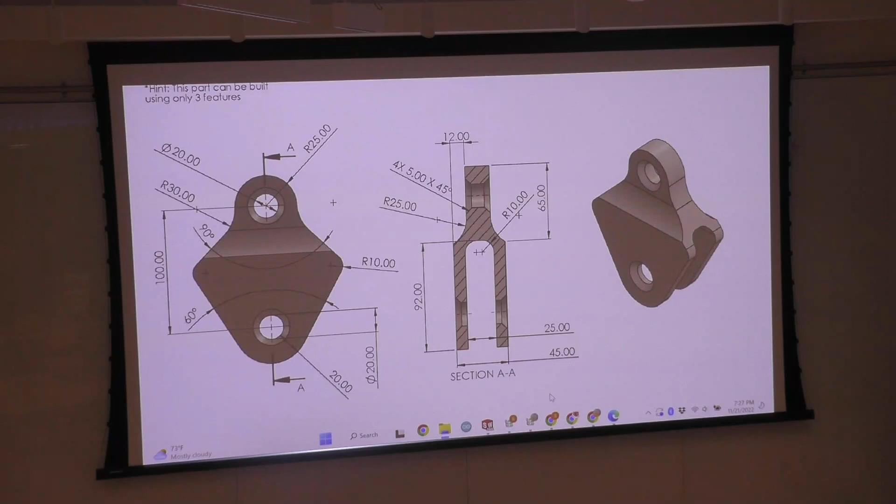Of course, you could just do everything normally and update the dimensions later, but it's a lot more efficient to define these global variables first and then change them later. In SOLIDWORKS, you just search up equations, and you have this window that pops up. I might as well just define it now. So A is 2.5, so we're going to put in 2.5, click tab again, create B, B is 18.

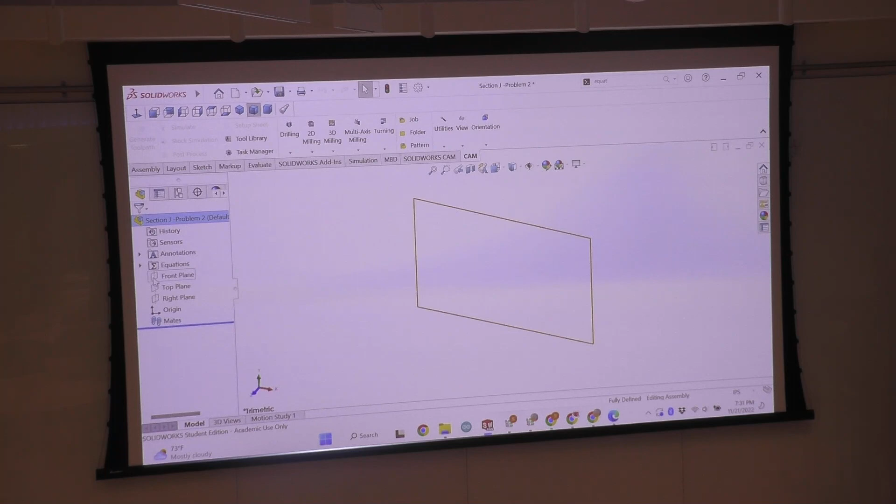There's a lot of shortcuts in SolidWorks that you can add, like toolbars and such. Like that view toolbar you see at the top left there, that's something I just added. I don't think it comes default when you open up the workspace. And you can find a bunch of those.

And it's really just up to, is there music coming from? There is music coming from it. Yes. That's really distracting. We'll just say 7:35. Okay.

Yeah, so you can add a bunch of those toolbars, but a lot of features like that are hidden, and you have to search for them. And that's just the way it is, generally speaking, unless you want to add the toolbar for it. It's just shortcuts and stuff that you learn.

Okay, I think that's basically time. Did anybody have any questions before we begin? No? Okay. So first thing, before working with any model in SOLIDWORKS is, of course, the unit system. So you can see that the unit system is IPS. That's correct. It's not MMGS for once.

And the very first thing that we're given is that we should insert the bracket base as a base part and use this origin as the assembly origin. I'll demonstrate this in a minute, but for assemblies, the exam will ask you for the center of mass, which is defined with respect to the origin. So if you do not set the correct origin, you will get a very different center of mass.

So to define the base origin as the assembly origin, we'll just go ahead and insert a component. So assembly, insert component. Go to downloads. This is my downloads. And so bracket base. And when you open it, you can see that you can actually drag it and move it around. You actually don't want this, because if you just click it when it's in some random position, it's going to define that as the origin.

So to avoid this, you just click anywhere on the left side, so you don't move your mouse anywhere to the right, and you click yes. And to verify that the origin is in the correct position, you can expand the part that you just inserted, go down to its origin and click it, so you can see it's the little blue dot. Then you click the assembly origin, and it's at the same position. So this is just to verify. So we have it inserted, so that's fine.

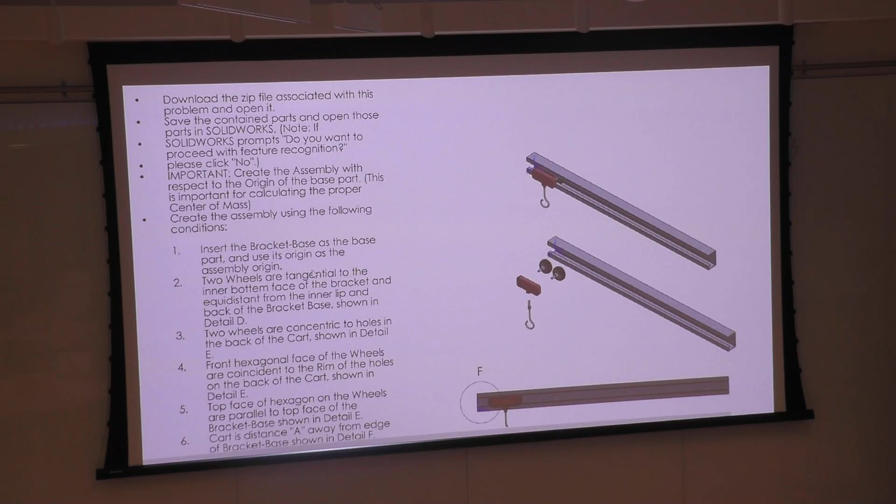The next step that we're given is to insert two wheels, and they're both tangential to the inner bottom face of the bracket and equidistant from the inner lip and back of the bracket base. And we're directed to detail D. So detail D is down here. Actually, I think detail E might be a little bit better for this. So this is a side view. You can see the face of the wheel is tangent to the bottom of the rack, and it's equal spacing on both sides.

So we'll just go ahead and insert one wheel for now. We'll insert the next wheel next. So insert, and we'll insert a wheel. And as you can see, it inserts it in the correct orientation, which is nice.

But of course, this may not necessarily happen. And so for this, you can just put it anywhere. And you can notice it's undefined because it has this little minus sign. So what that means is that I can just literally pick it up and drag it and move it anywhere. So it's not constrained. And in case this wheel is not oriented in the correct orientation, you want to go up to move component, and you want to go to rotate component.

In this case, it's on free drag. But if you wanted to have more precision, you can just go to delta XYZ and then change it according to the global coordinates. But in this case, it's fine. It's in the correct orientation, so we're good.

And the first thing that I would do is to first define this equal spacing constraint. So this is not actually a regular mate. You find this under advanced, and it's called width. So for width, you need to specify 4 things. You need to specify 2 width selections and 2 tab selections. So width is the outer boundaries, and the tab is the middle one.

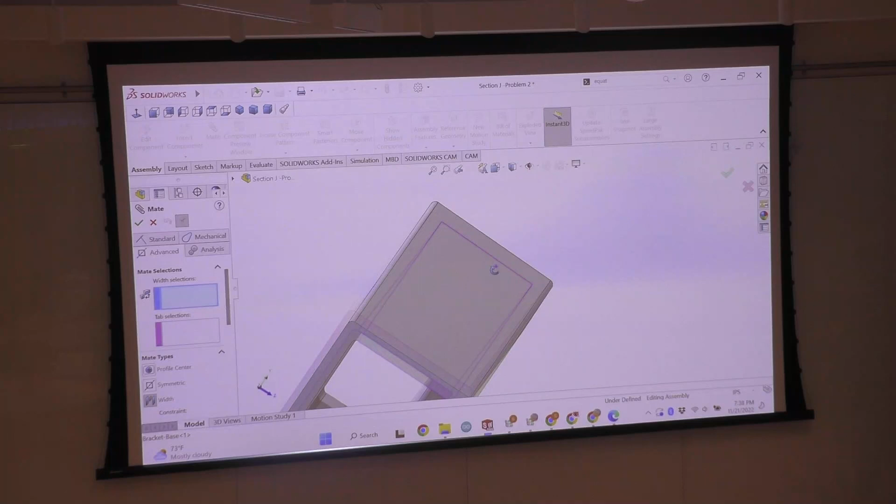So if we zoom in here on the edge, and then we look at it from the side, oops, sorry, it's inverted. What we want as the width is this little face here, and then the back face, right? Because these are the boundaries. And then as our tab, we want this inner face of the wheel, and then we want this outer face of the wheel.

And so it automatically mates it. As you can see, it's not inside the rack, but we'll change this soon. And for now, we can just click OK. And then we have the mate defined. So next, we want the wheel to be tangent to the bottom of the rack.

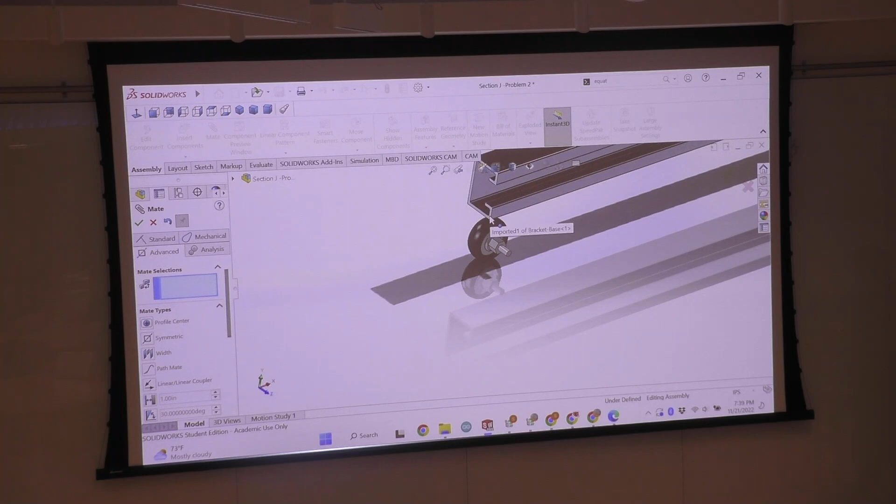The problem is that SolidWorks won't guess what you're trying to do. So for example, if I was to define a tangent mate right now with the wheel face and the bottom of it, it'll just move it slightly upwards, but it's nowhere inside, right? And so I'll just cancel out of this. To kind of force it to have the correct orientation, I can just manually move it up.

So I can just free drag it up, and you can see the problem we run into is it's no longer equidistant from the sides. And so with assemblies, what you can do is press Control B, which is rebuild. You can also go up to, I believe, Edit, Rebuild, and this just basically recalculates all of the mates. Also at the very top, the stoplight sign. Yes, that's also rebuild. And so you can see it's once again equidistant from both sides.

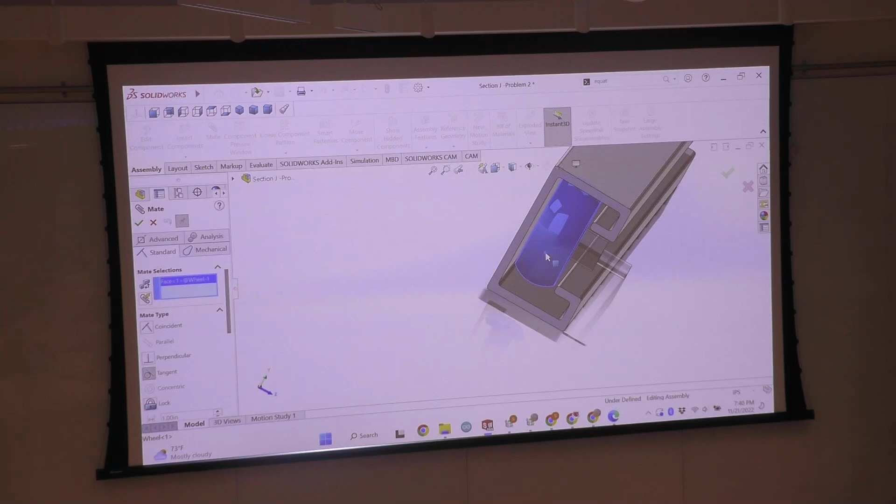That's good. And so now that the wheel's in approximately the right position, we can go back to mate, and we can go to tangent. And for tangent, you just specify a circular face. In this case, it's kind of circular, and then the bottom, and then it's mated. Okay, so that's one wheel. Next, we'll do the exact same for another wheel. I'll just breeze through this really quickly.

Now the alternative to redoing all of the mates again is to use insert components, copy with mates. I'll show you that after I finish this, but it sometimes works and it sometimes doesn't. And the interface for that isn't necessarily intuitive. So if you're working with not that many mates, as I am here, you can just redo the mates.

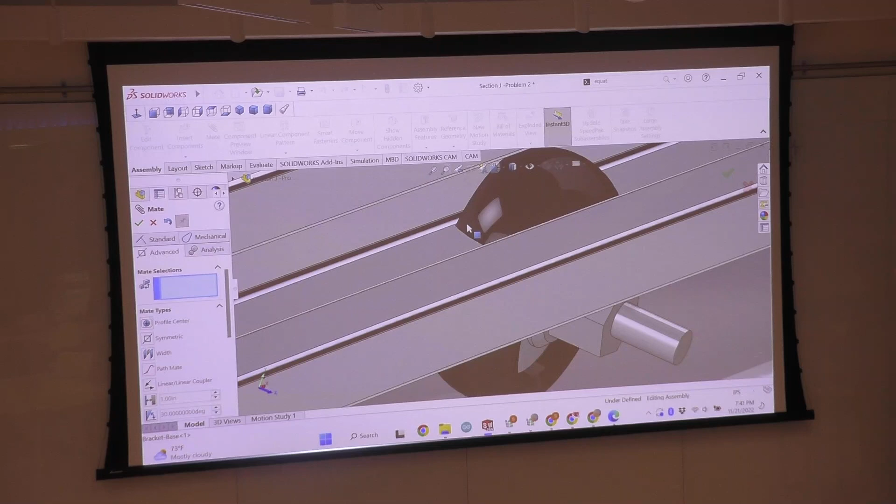So just make this outer face, and it's equidistant, and we'll go ahead and mate it, move it up a little, rebuild, go back into mate, and do the tangent mate. Okay, so those are our two wheels. As you can see, there's no cart yet, so that's the next step.

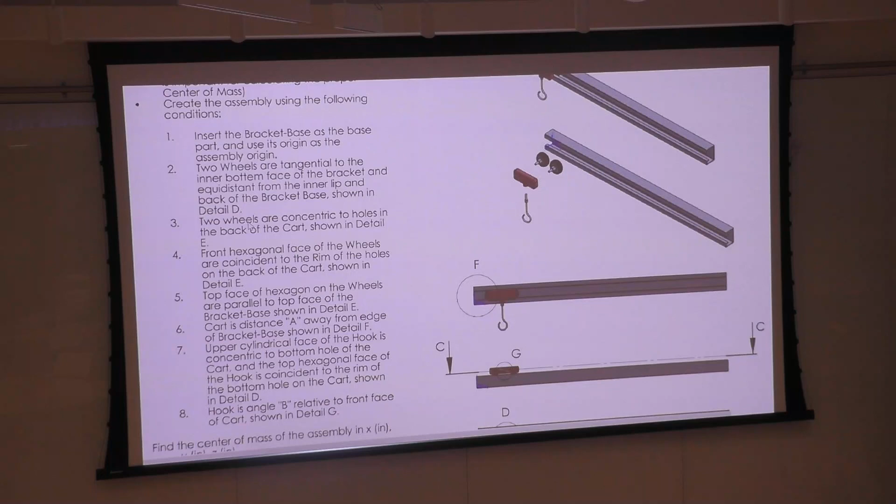We'll go back to the PDF. And we're on step 3. Two wheels are concentric to holes in the back of the cart, shown in detail E. Go down to detail E. Then we can see that the cart is here. And then if you look at the other details, you can see that it's flush. So we'll go ahead and insert the next component, cart.

Again, it's in the correct orientation, but if it's not, you can go to move component, move it around. I'll actually move this out a little. It said that this face, or sorry, no, actually this little circular face here, is coincident with this hexagonal face of the wheel. So we'll go ahead and define that.

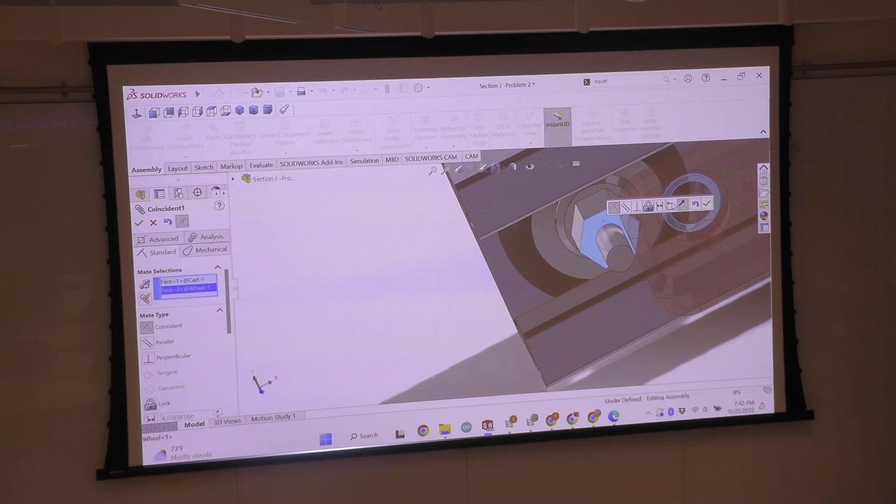Mate. This face is coincident with this face. It's a coincident mate, which is correct. And next, this circular rod is concentric with the interior. That. Okay, and we'll do the same for the other wheel.

Okay, now you see that we run into a small problem. We can't actually see it. So in this case, it's helpful to use the SolidWorks Select Other feature, which is if you click where it's supposed to be and you can't see it, you just right click and you click Select Other, and it gives you a little menu to select what to actually select.

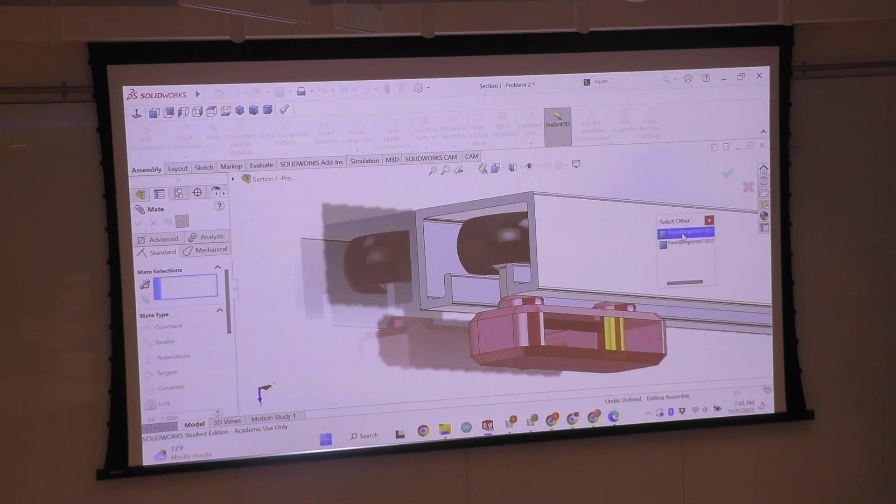So in this case, I know it's not this. I do want this though, right? So this is the interior, this interior cylindrical face. So I'll select that, and I want to mate it to the wheel. So I select the wheel, and then it mates.

Actually, sorry, I missed a parallel mate. Yeah, this mate. I missed this mate between the wheel and the top face. So I'll go back and define that. So it's between the top of the hexagonal face and the top of this rack. And that's a parallel mate, which is correct. Do the same for this. It's another parallel mate. Okay. So now we have our cart, we have our wheels.

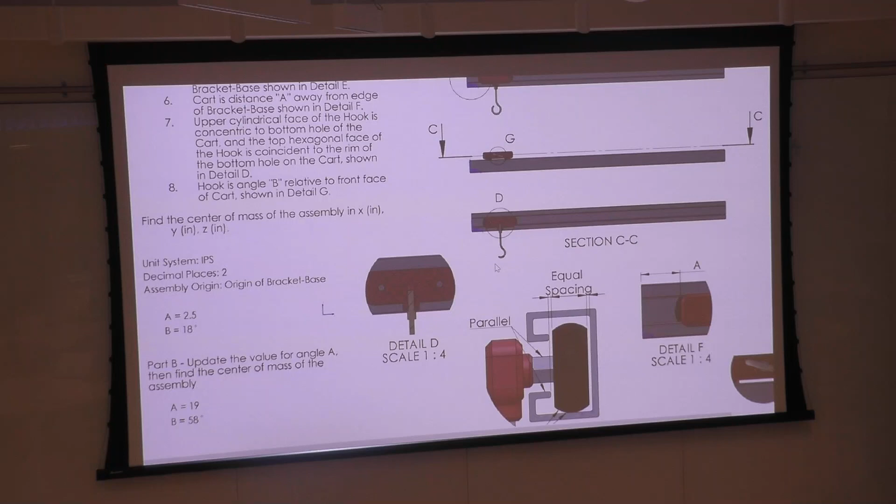What's next is step 6. So here we want a distance mate. The cart needs to be a distance A away from the edge of the rack. So you can see that in detail F. And so then we'll just go back to mate. We'll select the left face of the cart. We'll select the left face of the rack. And it automatically just finds a coincident mate, which we don't want. We want to change to a distance mate.

So in this dialog, you cannot actually define or relate to a global variable. You have to do it elsewhere. So I'll just enter in some random value, say like 20 inches. Click OK. And then to actually relate it to the global variable, we have to go back into mates. Click on the mate to expose the dimension. Double click on the dimension until this window shows up, and we'll say equals "A".

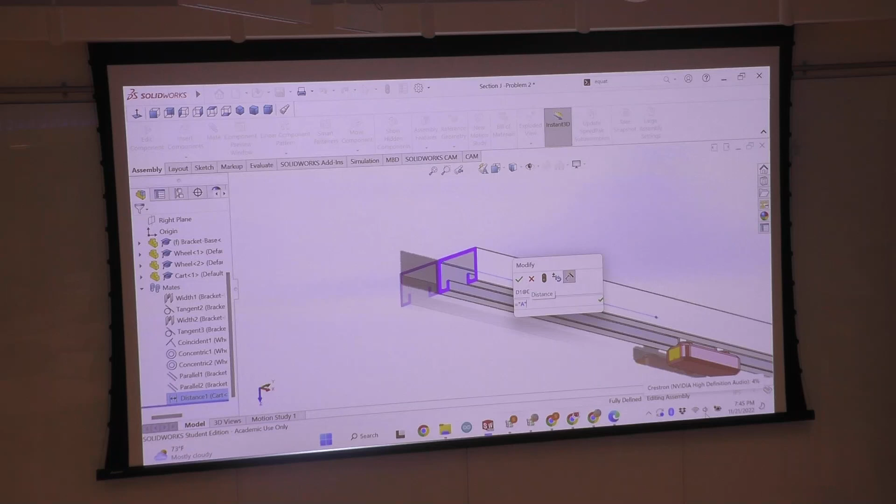So this syntax is important. You need the equals, you need the quotes to actually relate it to the global variable, or else this dimension will not update when you update the global variable. And so when you see this blue color, that means it's correctly defined, and we'll click OK. And now you can see that it has this little equation symbol, this kind of sigma symbol, which means that it's correctly related. And you can see this is definitely not 2.5 inches, which is the reason we have to rebuild. So Control B again, and now it's in the correct position.

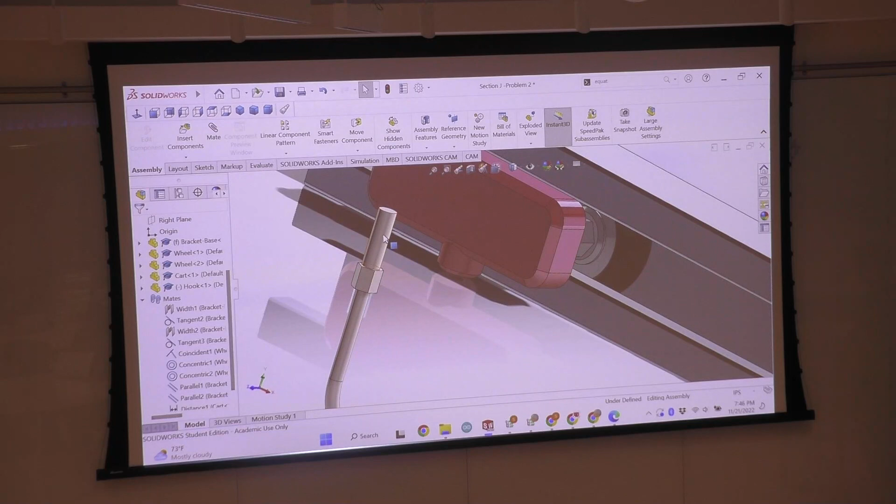So next step is step 7. Now we need the hook. And the hook, as you can see from detail G, is an angle B offset from the alignment of the bracket. So we'll go ahead and insert the hook. And we'll put it in some random position. And the first thing we want is to make this outer cylindrical surface concentric with the inner cylindrical surface, and we'll make this hexagonal surface coincident with this bottom surface of the cart. So we're just going to go ahead and do that.

Mate, select this outer cylindrical surface, select the inner cylindrical surface. Oh, and by the way, to pan, which is to move the view in the same plane in SolidWorks, is Control, and then you press the middle key. Go ahead and select this top surface, this bottom one. Okay, so now if we exit mate, you can see that you can't move the hook in and out, but you can rotate it. And so to define the correct orientation, we need to use B, the global variable.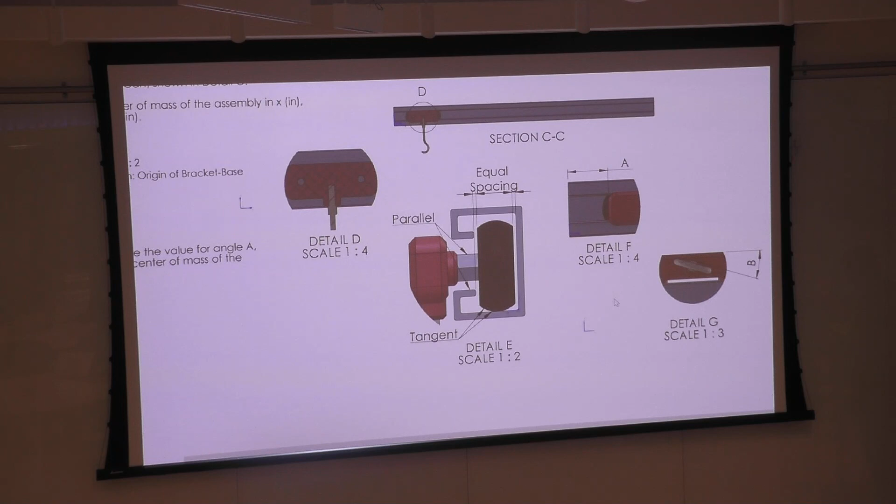And we can see that, well, it's kind of hard to see, but the hook kind of opens to the left. And then if you're looking at it from the top view, you can see that there's an angle B. So for me, at least, it was kind of hard to see which way it's actually facing. But you can kind of see from D that it's pointing towards you and not away from you. So this is the front face of the bracket where you can see the inside and the cart. So we'll go ahead and define that. And so this is the correct orientation. It is kind of hard to see from the drawings, unfortunately, but we're just going to go ahead and mate it.

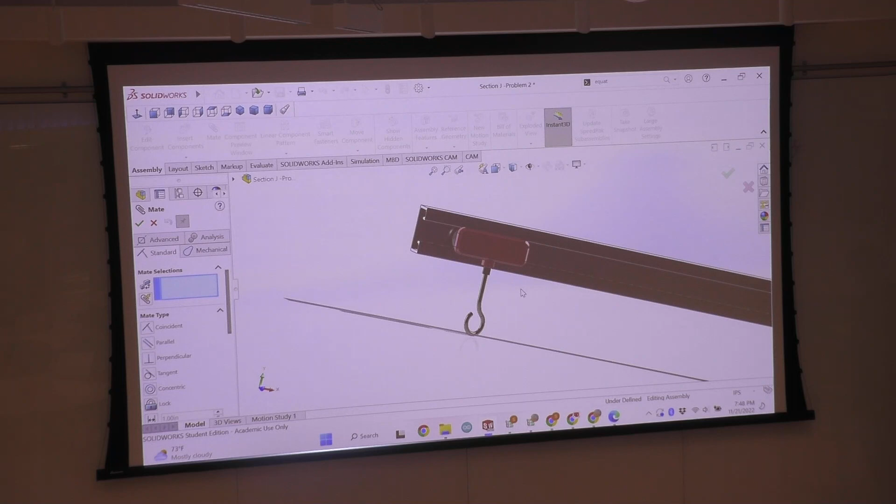And so in this case, we want an angle mate, which cannot be created between a curved surface, so I can't just select this curved surface of the hook. I'll actually have to do a workaround and select the hexagonal face of the hook, and I'll select the one that's aligned with the plane of the hook, so it's this face. And it wanted me to define it according to the front face of the cart, so I'll select the front face of the cart.

Why did it just turn hollow? Wait a second. Okay, so this and this, and it wants a parallel mate, but I'll force it to do an angle mate. And again, enter in some random angle value, 27 point whatever is fine. And we'll go ahead and add the relation later.

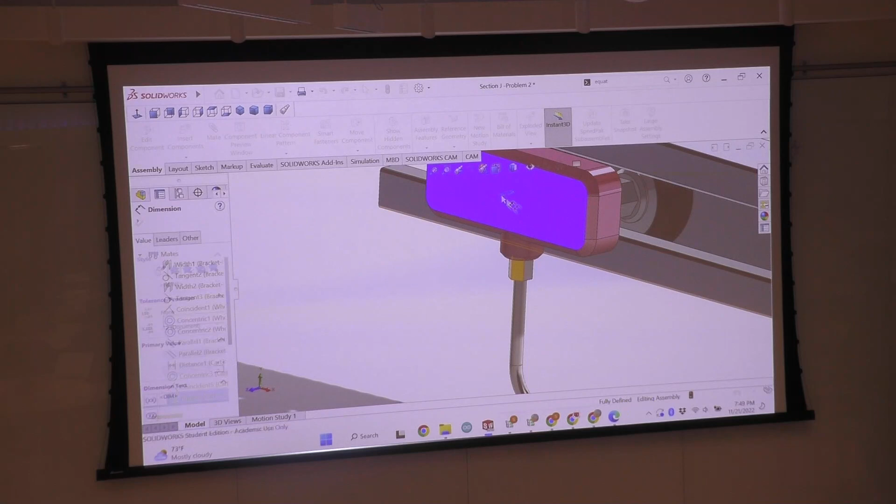So we click on the mate to expose the dimension, double click on it to expose the menu, and enter in equals B. And then once again, we shall see that there is a sigma symbol here, which means that it's correctly related to the global variable. And then click Control B to rebuild. And I believe that is all the mates.

So with our initial set of global variables, our center of mass, which you can find again by going to Evaluate, Mass Properties, this is the center of mass given. If you go to the answers, J2, 21.02, 1.39, 0.91. So we got all of these correct.

Sorry, we only had time to do one assembly, but assemblies are relatively simple compared to part modeling. Did anyone have any questions about this assembly? Yeah. Can you go over the width mate? Yeah, sure. That is a pretty complicated mate. So for width mate, normally you should see the standard tab. You need to switch to advanced.

And then for the width selection, you need to specify 4 faces. You need to specify the width selections, which are the outermost boundaries. And you need to specify the tab selections, a tab is like what you insert in between the width selections. And so it automatically makes it equidistant on both sides. You could do like 2 distance mates on both sides, but the width just automatically makes everything centered.

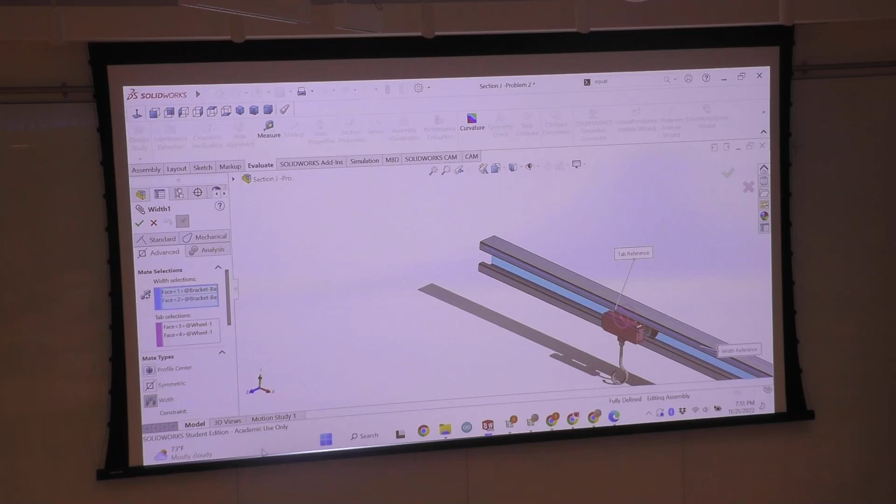Oh no. Do you know if you have to be inside mates? Check if you're in mate. Okay, I might be in mates. Spoke too soon. Okay, then it appears. Sorry.

So select other, and then it gives you this little menu, and it highlights the faces. So this is the interior face, this is the back face. So if I want to select the back face, I could do that. I think another way that might work as well is if you section view it and then select your face.

And also, you could think about the steps at which you actually want to make your mates. So you'd want to do your mates that would be hidden first and then assemble it together that way, rather than do all the mates and then have to go inside to find the hidden mates.

So in the problem where we define A and B, would you be fine setting the dimensions directly, or would you have to set it as the standard that you said to set? Sorry, could you rephrase your question? So for example, in the problem it tells us A equals 2.5 and B equals 18. Would we be fine, for example on the exam, just setting those dimensions, or should we do the equals quotation mark?

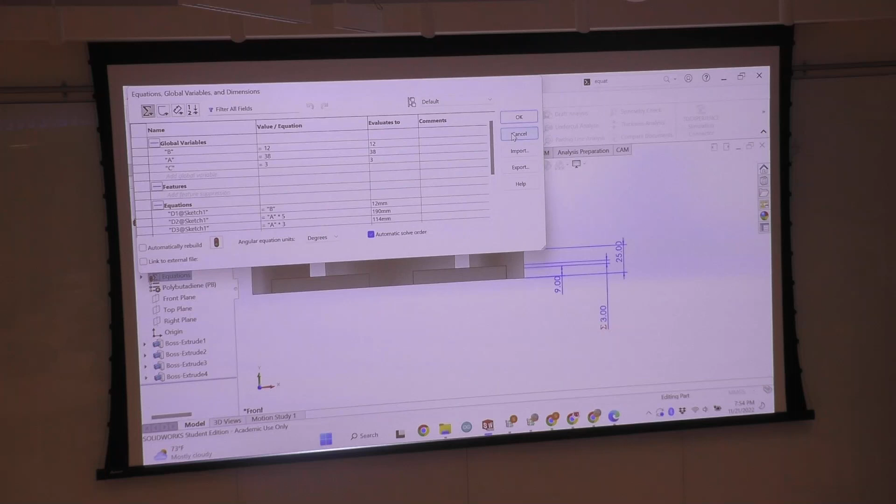If I were to update each one individually, I'd have to go back and recalculate all of them, rather than just being able to change A, B, and C values up here, and that automatically changing all the other dimensions. Correct. So if I go to B, which is part B of the equation, it changes all these values, and these stay the same, but it updates the entire model. The model behind here is changing as I change A, B, and C, which are all linked to the rest of the dimensions.

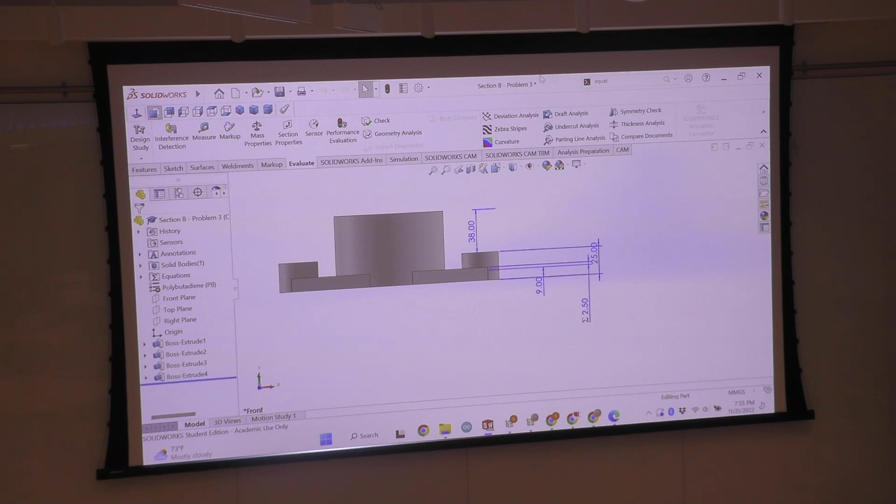So as Abe said, for 1 or 2 of them, it's fine if you don't use global variables. You don't need to for the exam, but it will make your life a little bit easier, and the chances of making a mistake are less, because everything is linked to one source. You can exit out here if you want. Those are really good questions. Keep them coming. Any other questions?

For part 4, in general, do you want the rim to be the outer or inner part of it? If there's a chamfer, I guess, but if they're on the same plane and you don't anticipate it to be changed, then anything would be fine. You can select the face, the chamfered rim, or the outer, because I don't believe on the CSWA they'll ask you to modify the parts given.

So you should assume that the parts given are the final product. They're not going to change it. The only thing you're going to change is the mates and how they're oriented. So as long as it's visibly in the same plane, you can use anything on that plane to define. Does that answer your question? Well, is there a good principle for deciding one or the other? Because in the detail you can't really tell which part is principal.

Sorry, you said detail? In the detail, you can't tell whether the hexagonal part would go stuck in or all the way through the chamfer or not. Right. Okay. Well, if it was stuck further in, then there would be interference between the chamfer and the horizontal. So it's a little bit of an assumption there. That's a good question.

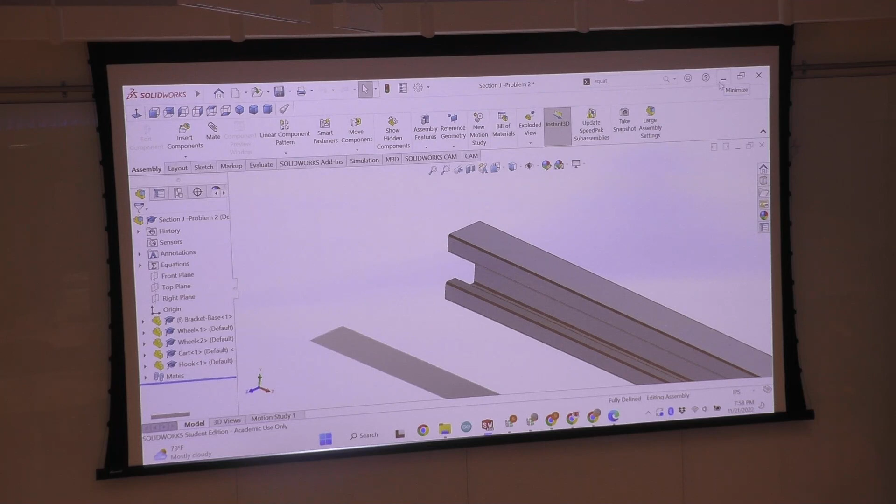Awesome. Okay, well, moving on to which one here. Okay, well that basically concludes what we've done so far for today, and that's what we have.

You guys have the extra parts if you want to go over them, practice on your own, and get back to us. If you feel like when you model the part you get the incorrect mass but you're not sure why, or if maybe you think you did everything correctly and it's just still wrong, let us know. It's possible the answers might be wrong, and we can double check that for you. So if the masses don't line up and you're confident in what you did, that's okay. Reach out to us. We'll be happy to help you out.

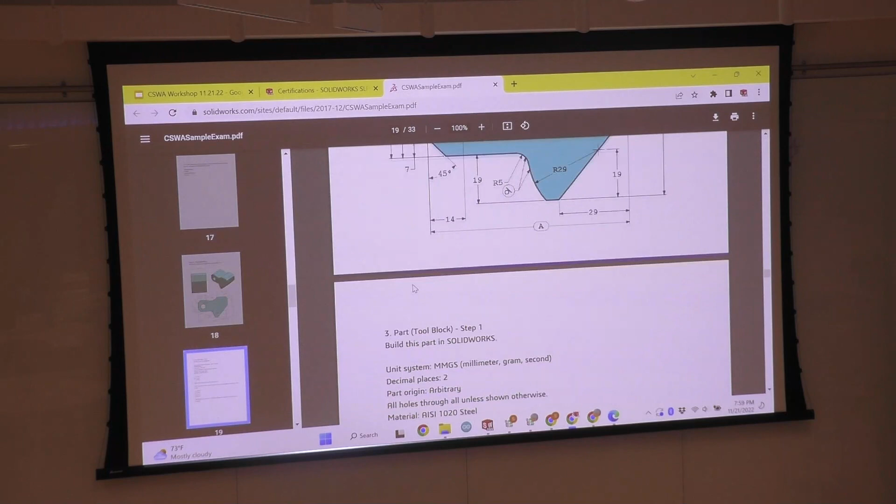So let me go over really quickly how to get the sample exam and how to get the certification test. If you go to this website right here, which is solidworkslp.org, it's also shown on that screen. This is our website, and if you go to the certifications tab and scroll down, this explains how to get the voucher. What you need to do is take this exam, which is linked here. It's a PDF that basically goes over how to download the proctoring software, what the exam is, and how to take it. So we showed you those parts in the images.

Let's see. Assemblies will look like this, and it'll point to certain parts. Yeah, and then it's key. So you just take this practice exam. It looks complicated, but trust me, once you actually get into it, it'll be simpler than it looks. After you do the exam, it'll give you a score telling you how well you did. And you click this link, and you show us a screenshot of what the score is and what exam you're trying to take. Obviously this is for CSWA, but if you're interested, you mark that down.

Submit it, we'll see it, and then if you have a passing score, we will email you a voucher. But the thing is, we can't email vouchers at the moment. We can only send tests to accounts associated with your UCLA emails. So when you fill out this form, make sure you put in your UCLA email, which is said right here at the top. Because if you don't, we can't really send you an exam.

The exam will then be in your SolidWorks account, meaning when you create your Tangix software account, which is at the top here, you have to make an account with the proctoring software right here. Yeah, you have to make an account. Make sure you make it with your UCLA email, and then we'll be able to send it to you that way. It'll be automatically in your account, and you have to take the test within 30 days of receiving it.

If you're not confident and you don't want to take the test yet, that's completely okay. You can wait. We're going to host more of these workshops in the coming winter and spring quarters. You can attend more of them, get more practice, reach out to us if you have questions, and when you're ready, you can try and take the exam.

However, you can't take the exam back to back. So if you fail it one time, you have to wait, I believe it's like 2 weeks or 4 weeks, a certain amount of time before you're actually able to take it again. But usually if you pass a sample exam and you do well and you're confident, you should be completely fine. Don't stress about it. Are there any questions about anything we went over today regarding what we do or how to take the exam? Yeah.

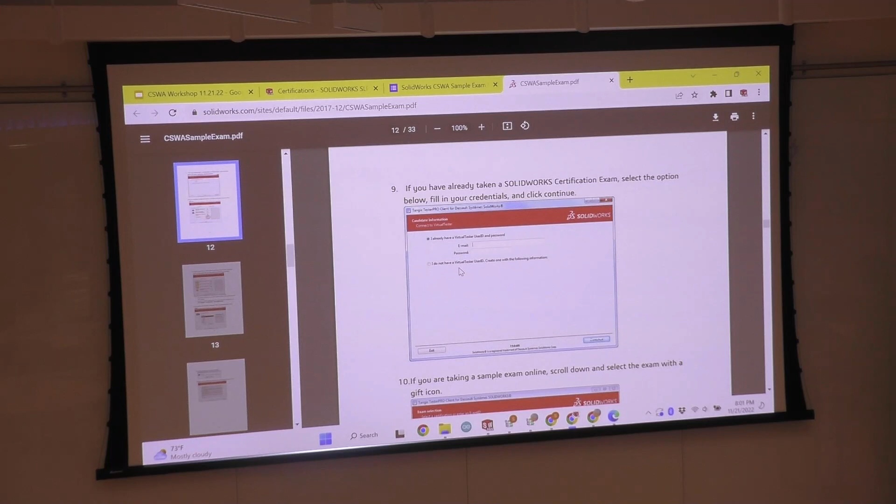Can you just put the URL before the slide again? Yeah. Here we go.

Not related to CSWA, but the CSWP, if we're interested in going for that as well, do you guys also have workshops for that? We don't have planned workshops for CSWP. If you're interested, talk with us. We'll be happy to help you out. Both of us have the CSWP, and we'd be happy to work with you to get that. The reason we don't host workshops is, unless we have a large interest, a lot of people are content with getting the CSWA and don't want to go farther.

And it's especially fair for the CSWP because that is a lengthier exam. There's 3 parts to it, and it's a lot more knowledge you have to learn. You have to be a lot more skilled in SolidWorks. For that exam, it's not just being able to model, it's being able to model efficiently. When you saw how I thought about the process, those parts I showed can be modeled in many different ways, and some will take longer than others.